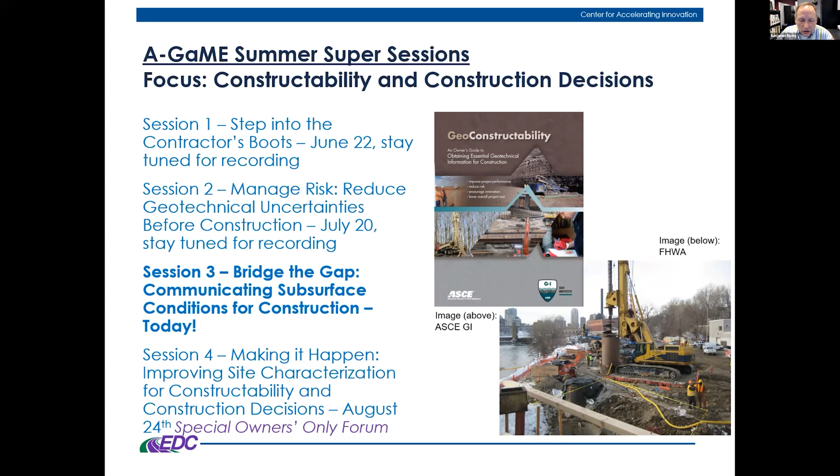This session is going to be geared toward the communication side of that. We have one additional session coming up next week, and that's for owners only. It's going to be a workshop session, and we'll talk a little bit more about that at the end of today.

So today's lineup, what you can expect to hear about and discuss during part 2. First, we're going to be talking about a resource, the geoconstructability document that was put together by the Geo-Institute, I think back in 2011. We've talked about it, we've referenced it, but we haven't opened it and haven't really got into what that entails. So Jim Morrison is going to lead us off with that and some other thoughts on the geoconstructability aspects.

We'll be talking about the communication mechanisms we have from the reporting and geotechnical baseline reports. And then we'll jump into digital transfer of geotechnical data, the next generation of how we can communicate better and improve our understanding of conditions during construction. And finally, one mechanism we have to communicate these conditions is digital visualization and integration of that, since we live in a digital age now.

Leveraging that aspect is, I think, where we need to be going if we're going to improve our understanding of conditions and take advantage of that. So that's going to be the itinerary today.

And this goes into the geoconstructability report. As Ben mentioned earlier, this was developed in 2011 with a number of contributing authors. I think Alan, who you'll hear about as well, was also a contributor. The purpose of this document was to help project this geotechnical information to a level of construction so that it is more useful and solves the problem we talked about.

The first thing I want to talk to here is the table on the slide, which identifies different types of geotechnical reports, whether they're a site assessment or a feasibility study. These are in the planning stages. The design memoranda is specifically written during design to address a specific issue. A design summary report is prepared at the end of design to document how the design came together and what was

incorporated into that design. Then a constructability memorandum would be written at the time of design to feed into the design process, get people thinking about that, and guide the development of construction documents. And when you get to the level of construction documents, you're dealing with a geotechnical data report or a geotechnical baseline report.

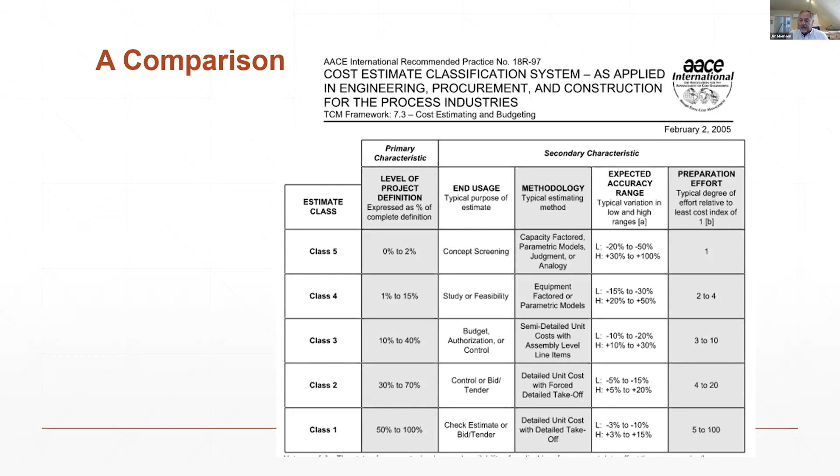Those that have estimated work, it can be 100 times difference. So when we take that into the geotechnical world, we're looking at reports that come out during a planning phase or a design phase or into construction. And this is made up by me on level of efforts, but I think a lot of people would agree.

In a planning phase, when you're doing a feasibility level evaluation, you may have the project defined from 0 to maybe 30%. Now, the geotechnical information at that time is usually done on a grid pattern. So you've got a series of boring points, and plans are developed from there. What we find in most projects, this is the time period when the geotechnical data is gathered. And many times this is the only time geotechnical information is gathered.

So once you get into the design phase, the geotechnical engineer will write a memorandum to the designer on a specific issue with advice on how to manage that specific design, the foundation elements, the retaining walls, whatever it happens to be. And at the end of that design, a design summary report is pulled together, which documents the decisions and interpretations used for design. And that's all well and good.

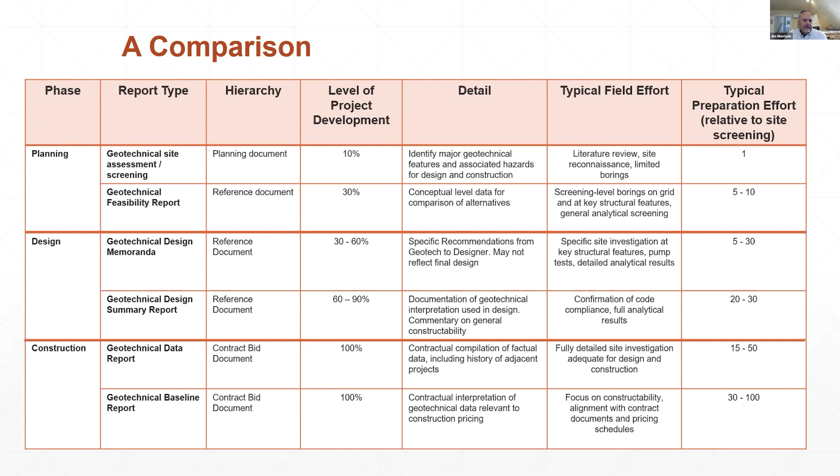One step above that is the geotechnical baseline report, which not only references the factual data, but provides the interpretation of that data for use by a contractor to prepare his bid. So the key to a baseline report is that it's from a project team to a contractor. It's focused on construction issues. So for example, if a design summary report is handed to the contractor, it may or may not be relevant to his construction issues. So this takes it to the next level.

A question that arises: how much geotechnical information do I need? And while there are many rules of thumb out there, the answer is enough to address the issue at hand. Now, because of the developing nature of projects, my recommendation when I talk to people is that geotechnical investigations should be phased along with the development of the project, so that the team has the ability to go out and address specific issues at specific times when those questions come up.

It's not hard to understand that at that feasibility level stage, when the first geotechs are out there collecting data, the level of issues that are going to arise are really not known at that point. It's the plus or minus 30% comparison I was giving. So back to our geoconstructability report, and with a quick Google search, you'll find that this is free online, which is very good for the industry.

But this document attached 10 different appendices for different types of work, and goes through a whole list of issues that are unique to that work and what should be considered when developing a geotechnical report for the purpose of construction. And without going through all of it, I will show an example here for deep foundations. It talks about things like for drilled shafts and for driven piles, the types of information that are critical to accurately estimate those operations. And so this is a good checklist or reference list to get started. And that's the purpose of it.

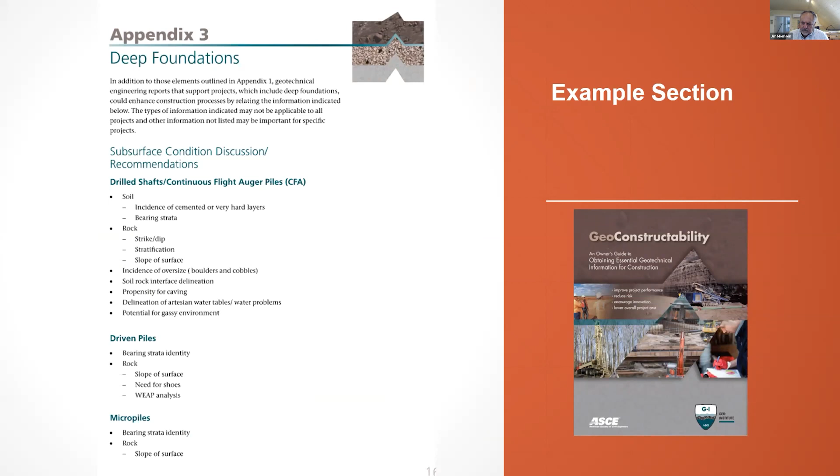Now there's another reference that's available, and this is the Geotechnical Baseline Reports for Construction document. It's a nice little handbook, first published in '97, updated, the second edition that you see the cover here, called the Gold Book, in 2007. And we have, in fact, submitted to ASCE for publication the third edition, which will come out hopefully by the end of this year. And if we have our way, it'll be called the Platinum Book. We'll have a platinum bar across the top.

But in that document, we also prepared a summary of things to be baselined for things other than tunnels. Now, a little bit of background: the baseline report concept came out of the tunneling industry. So the document talks about tunnels a lot, but on purpose, we took the word tunneling out of the title, as it's intended to be used for construction in general.

And chapter 7 in here focuses on things other than tunnels, like you see on the screen, whether they're driven piles or drilled shafts. You'll see a lot of overlap between this document and the geoconstructability report, but both are good references to use as a checklist as you're developing a geotechnical assessment for the purpose of construction.

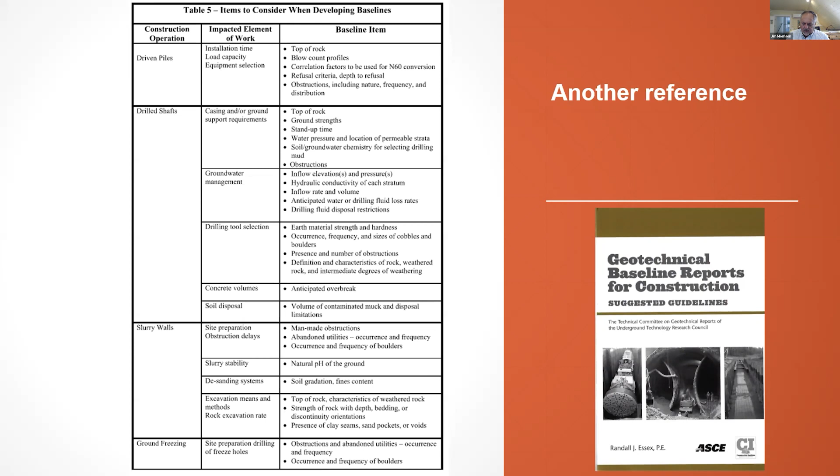I'll talk a little bit here about baselines in general. The purpose of a baseline is first to set a clear and realistic expectation of the ground conditions to be encountered during construction. This is a contractually binding interpretation which keeps all of the different contractors on the same playing field, with the purpose of making the pricing uniform, making the assumptions made very clear so that everybody's on the same sheet of music.

And also it assists the contractor in evaluating the requirements he needs for excavation, ground support, those things that a contractor has to design. And it also assists the owner in administering the contract. And if there's a change of conditions from that baseline assumption, the contract change provisions come into play, and this helps the owner administer it without going to court, without fighting through it, is the idea. And it also helps monitor the performance during construction. So that's really the purpose of a baseline report.

So key points: the baseline report is the interpretation of geotechnical data, where the data report is the factual presentation of data. Both need to work together, both need to reference each other, but the GBR, the baseline, will take a higher precedence because it is the contractual interpretation. The GBR should be focused on construction issues and not design issues. Again, it's a report as a bid document for construction. So those are the issues to be focused on. The sigma, gamma, delta curlicues that you used in design really don't come into play at this level and should be held in another report for other uses.

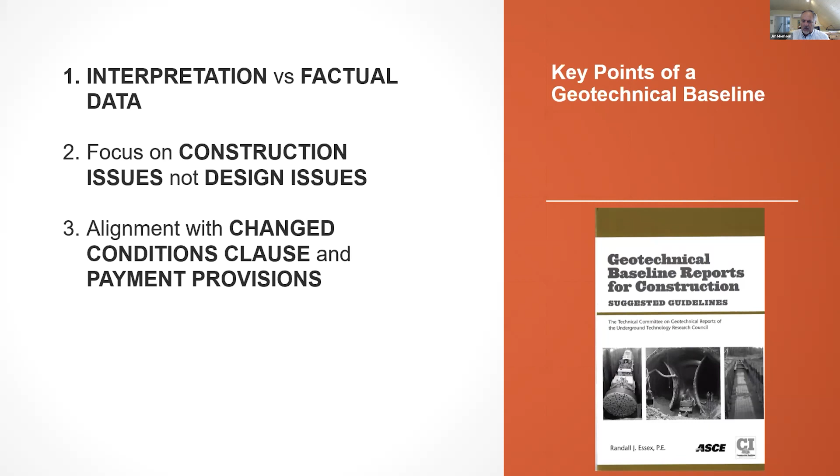So one of the key things here and where things go wrong is when there's a misalignment between what the baseline report says and what the change condition clause says. I've seen several cases that have gone through a very extensive baseline only to turn into the contract general provisions, and it says, basically, there's no right to present a change condition claim. Well, this is a case that ends up in court when you don't have that alignment. Likewise, in the payment provisions, if the baseline is based on one thing and the payment provisions another, then you get into a dispute on what is the baseline and how does this affect my pricing.

So common problems that we've seen over the years. Number one is when a design summary report is given a new title pasted on it, called a baseline, but it's really a design summary report. Doesn't focus on construction, goes through all of the sigma curlicues of design. They have trouble when they give an inadequate description of conditions to be expected. For example, if the baseline is written as the ground ranges from soft to hard, what does that mean to a contract? It doesn't mean anything. Or they're ambiguous, or they're qualitative. Being concise and in alignment with the decisions being made for pricing is where this needs to get to.

We've seen owners try to play games in putting these together, presenting an overly conservative or unrealistic baseline in an attempt to shift risk to the contractor, making him responsible for everything. Sounds good, but many a court case has come out of this scenario. So the lesson learned goes right back to kindergarten: be straight, be fair, be as honest as you can be, and life is better. The fourth most common problem is when there are conflicts between the baseline and the payment provisions or specifications. If those aren't in alignment, then you're going to have a lot of questions and be shooting from the hip, so to speak, in the field.

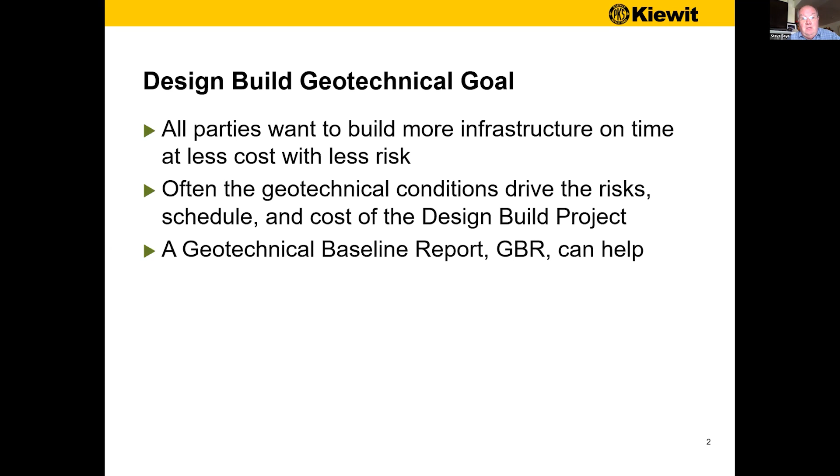The goal I would have for this presentation is to get everybody to agree that we all want to build more infrastructure on time, at less cost, with less risk. In my experience, geotechnical conditions, particularly on design build projects, can escalate the cost, the schedule, and all those things. From our experience, we believe a geotechnical baseline report can help, particularly on design build projects.

Now, some concepts for people not necessarily working in the design build world, but it would go to many estimates: most of the cost and risk reductions are really related to the contractor, to the tools you're going to bring to the site, the means and methods, how you're going to build something. Many of those decisions happen relatively early in the proposal and bid stage. But if you don't have the right equipment, if you don't have the right stuff, problems are going to happen and costs are going to escalate.

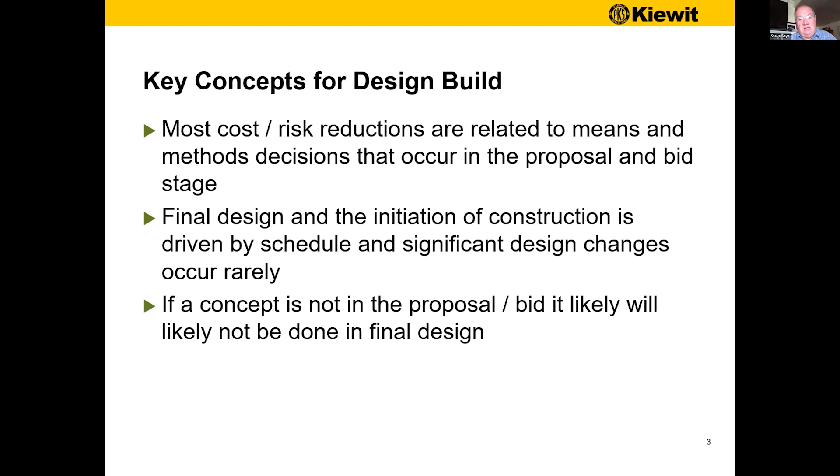As we get from the bid stage and go into, we've won the job and now we've got to go into final design, that's a pretty concentrated period of activity. Everybody wants to initiate construction quickly. You rarely see design changes occurring in the initial stages, so the builder is focused on implementing what they've done. Final design is a hard time to be able to significantly change the cost or the schedule. As I learned very early in my Kiewit career, if the concept's not in the proposal, it's probably not going to be done in the project.

Some concepts, particularly as things relate to design build projects: you want a comprehensive geotechnical investigation pre-bid, and it helps everybody. The design build teams, in many instances, are required to spend significant resources just initially defining the geotechnical issues. Particularly in the case of the job in Hawaii that I'm going to talk about, a geotechnical report can reduce the subsurface risk at bid time by organizing the subsurface data and defining the ground conditions as the basis of bid. And as Jim indicated, it's an opportunity for the owner to lay out the owner's perspective of the ground conditions and align all the contractors so they're all looking at the same thing. With the geotechnical baseline report, the design build team is then focusing on how to deal with the geotechnical issues, not trying to understand what those issues are. I believe that's the route to get better projects, lower costs, and better schedules.

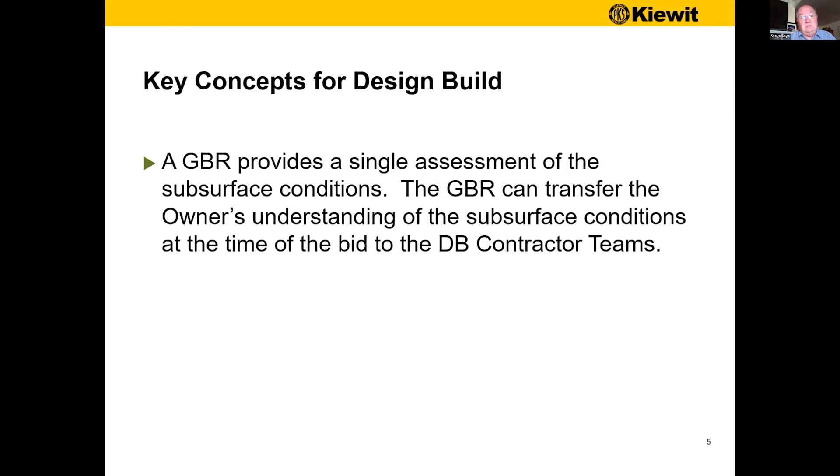The wonders of a baseline report, I believe, is you have a single assessment of the subsurface conditions. I believe they're best when the owner or the owner's engineer has spent lots of time looking at the project, evaluating it, and understanding the problems or issues regarding the subsurface conditions. This provides a method for them to communicate those to the contractor teams and get the contractor to focus on the things that are important for the project and for the owner.

Now, as we look at the things the owner's geotechnical engineer should be involved in, I believe it's extremely important for them to look at what are the two or three important geotechnical factors that are going to significantly impact the project. It could be a settlement issue, a pile issue, but every project has a couple of things that are really driving the show from the geotechnical perspective.

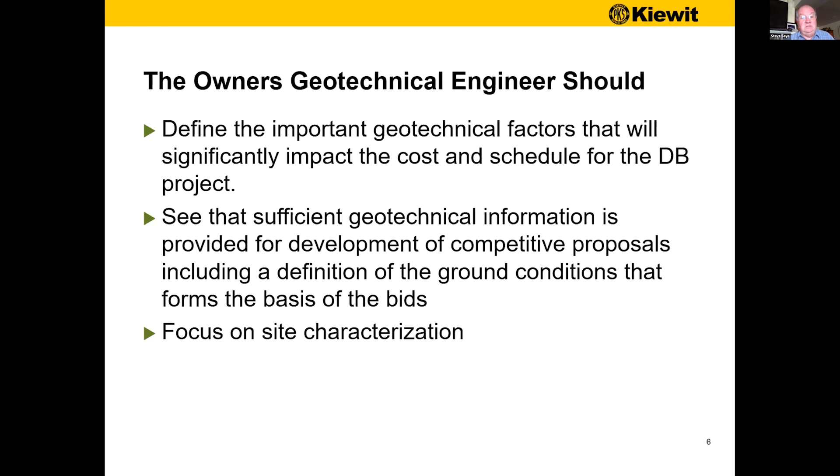I believe it's important for that engineering team to ensure enough information is provided so that competitive proposals can be developed. That's not only a discussion of what the ground conditions are, but also whether you need consolidation tests, whether you have enough information to evaluate the particular mode of settlement going on, and whether you've defined the ground conditions where the piles are going to go. It's my opinion that the owner's geotechnical engineer needs to focus on site characterization—what are the ground conditions there.

Now, things that really aren't very important to the design builder are the owner's foundation or ground improvement design. We'll have an obligation to develop our own, and where the owner may have something they'd like to see, the design builder is going to have to go do that on their own—we're probably going to repeat what the owner's done in that instance. As long as we have sufficient information to understand the ground conditions and characterize the engineering behavior, we're going to be in pretty good shape.

Now, I'll focus on this many more times—a GBR helps by defining the ground conditions at bid, and it's also very important where the owner can focus the design-build teams or contractors on key issues about those ground conditions.

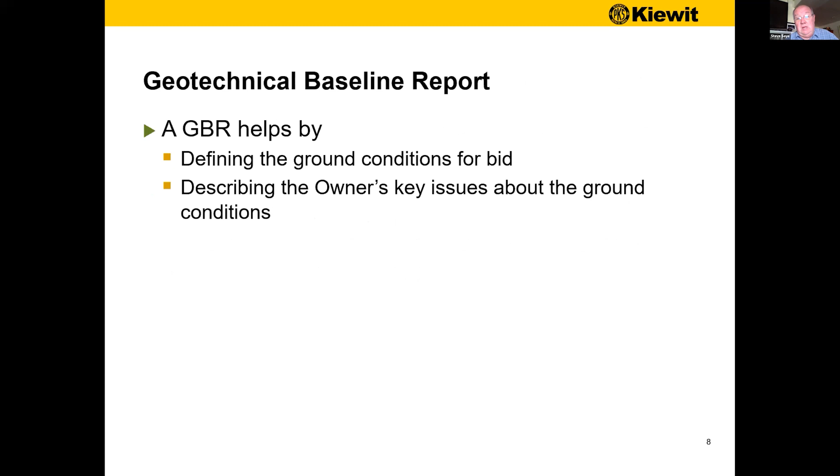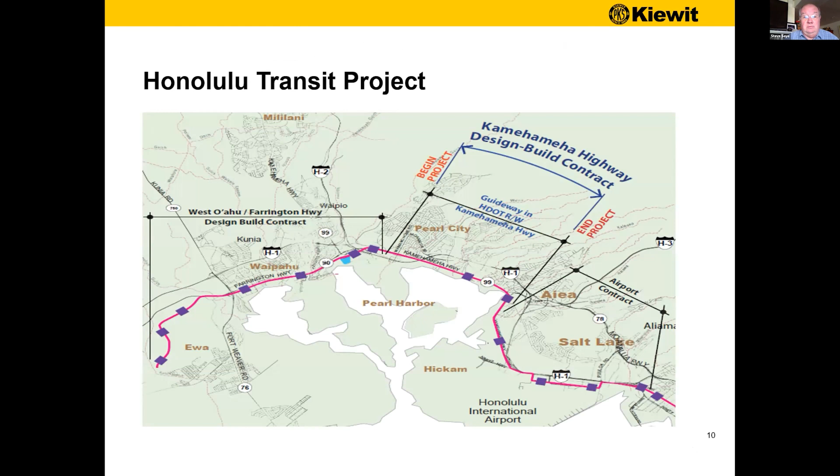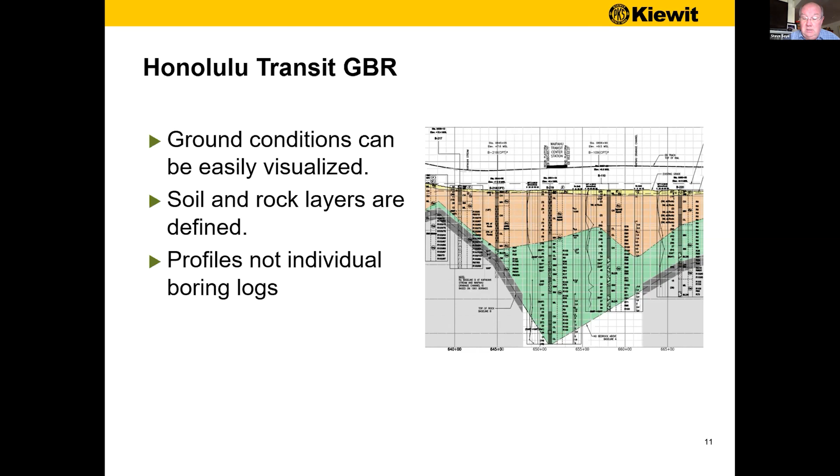This is in the context that, because it's a design-build job, only about 20% of the required borings had been provided at bid time, and the design-build team had to do the other 80%. This provided a mechanism to understand what the ground conditions were at bid time versus what we encountered in our final investigation, and whether there was an important variation.

Now, things built into the project that I think were particularly important, and that we see very rarely, is that they prepared geotechnical information to help define the contractual ground rules of the bidding process regarding allocation and definition of the geotechnical risks. These baselines were developed to serve as a contractual basis for comparison with the actual conditions encountered during construction, and the contractor may rely on these baselines in preparing his price and proposal.

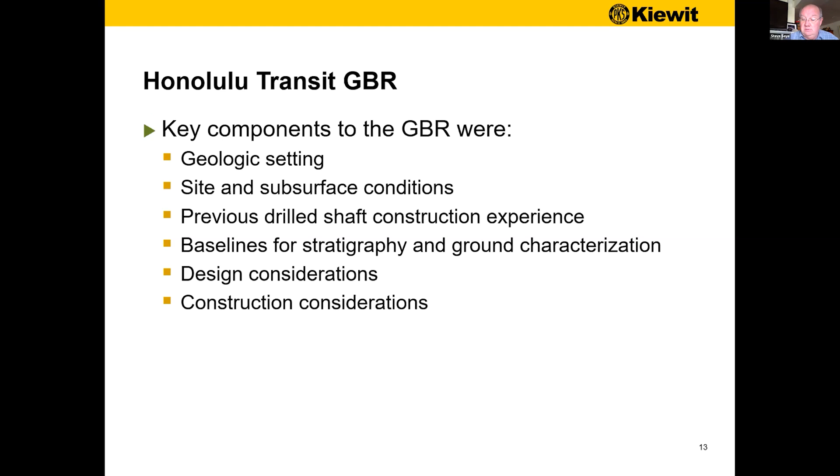The key components of the baseline reports included a description of the geologic setting, a definition of the site and subsurface conditions, and a discussion of past drilled shaft construction experience, since most of the project was drilled shafts. We had baselines of the stratigraphy and ground characterization, some discussion of design considerations, and a specific section on what Parsons Brinckerhoff and the owner considered the key construction considerations.

And in the end, after $800 million worth of construction, we had no claims regarding the subsurface conditions.

The assessments that had been made at pre-bid were generally validated with our final design, and we elected to have no claims associated with the conditions described in the baseline report. Now, a little bit of additional things that I would look at to try to repeat is, again, the understanding is this pre-bid geotechnical data is the whole basis of the team's design, schedule, and cost from a geotechnical perspective.

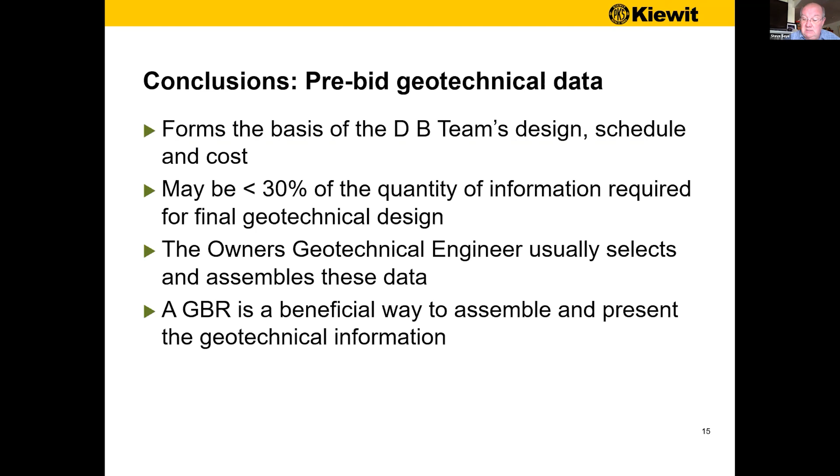And it could be 20 or 30% of the information that's really needed. The owner's geotechnical engineer is going to accept, select, and assemble the information. And it's my belief that a geotechnical baseline report is a very beneficial way to assemble and present this information for a design build project. An element of just some opinions now regarding making the baseline report and those investigations.

We need a thorough investigation. In my opinion there's a preference for more routine borings or cone soundings rather than a few borings with sophisticated testing. In my past experience, if we need the sophisticated testing, we're probably going to include it in our final design, but that's going to be focused on a particular scheme or process. So more borings, better definition of the site subsurface conditions, we think is better.

The other thing that we've seen in a variety of reports, all of this information, particularly on a big design project, is going to go into some kind of a 3D model to define the ground conditions. So we absolutely have to have survey information to give us the XYZ data to be able to make that 3D model successful.

Things that I don't see in many geotechnical investigations: you're in a seismic area and the SPT hammer energies are not presented. Groundwater levels are a chronic problem, I think, at least in my instance, of not having a good definition of the groundwater table or having no information on a log as to what the groundwater level is.

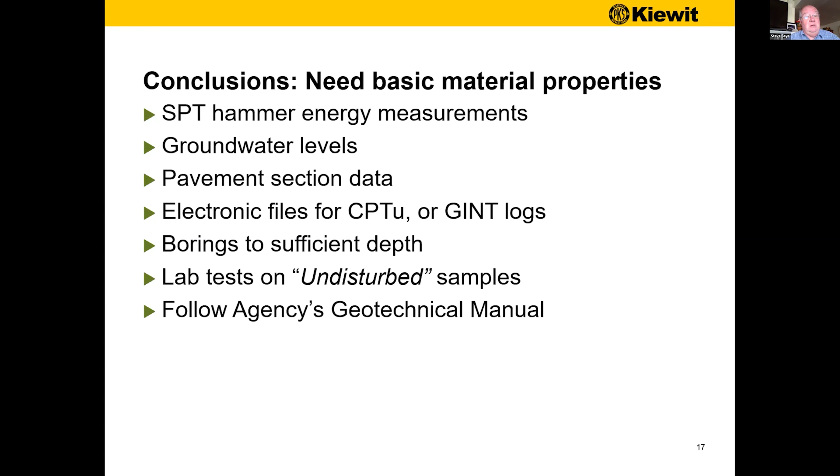And then we love the geotechnical instruction manuals that the states have, and it's just important to make sure that subcontractors have actually followed the manual.

Timing of information, particularly on the pre-bid, we've certainly seen projects where information can dribble in at the end. Geotechnical design, particularly on a large project, is essentially complete about halfway through the bid period. There's a bunch of other things that have to happen after that, and data received after that time is probably as much confusing as helpful.

And it just really doesn't do a lot to impact the design builder's means, methods, and costs. Receiving the results of an Osterberg cell test on a drilled shaft two days before the bid is due—it's just really hard to get that thoroughly evaluated and incorporated.

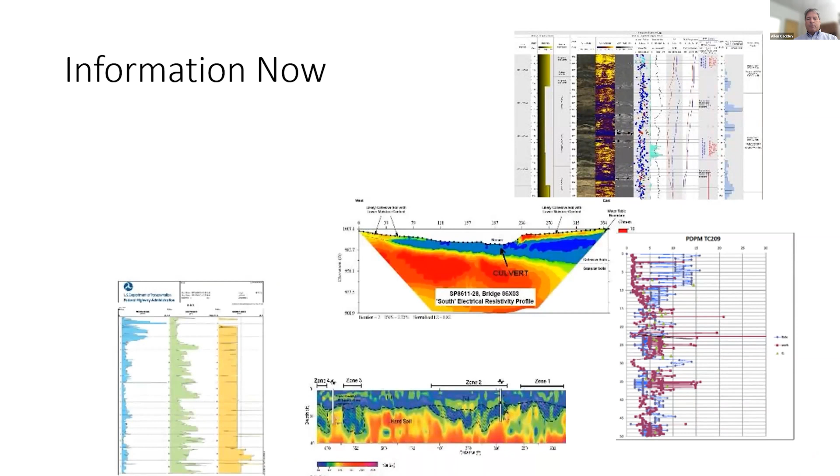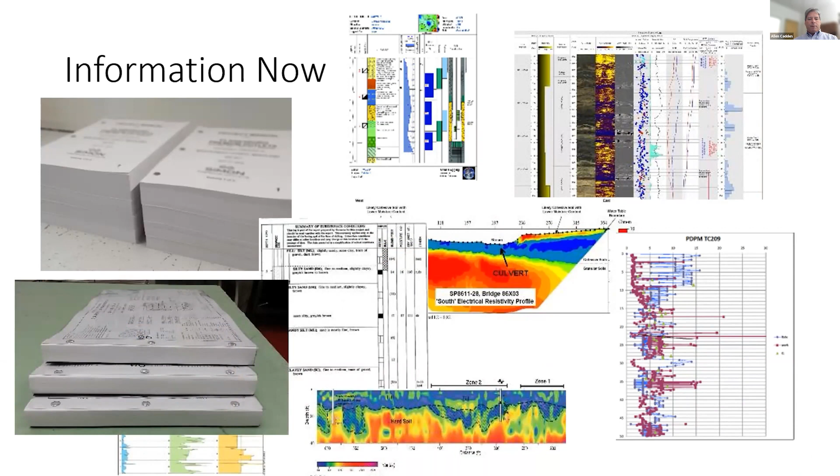The beauty of computers, though, throughout our careers, is that projects are getting larger and we're able to create more and more data. We're generating massive amounts of information to provide to the contractors, and that information should be usable during construction and to develop the bids. The key thing is, though, we dump all this massive data on you and ask how soon can you give me the price. As Steve indicated, getting data two days before the bid is due doesn't do anybody any good because we just can't assimilate it into the process.

So let's cut to the chase. What if we did something totally different? DIGGS is a standard that we've been working on for about 15 years, and the goal is to be able to exchange data in a common structure that software can understand and use. We don't want to continue manipulating spreadsheets and columns and trying to figure out what units they're in to make sense of it. This is not a proprietary system. It's open source, and everyone is welcome to contribute to its development and the refinement of the schema itself so that we can keep it growing.

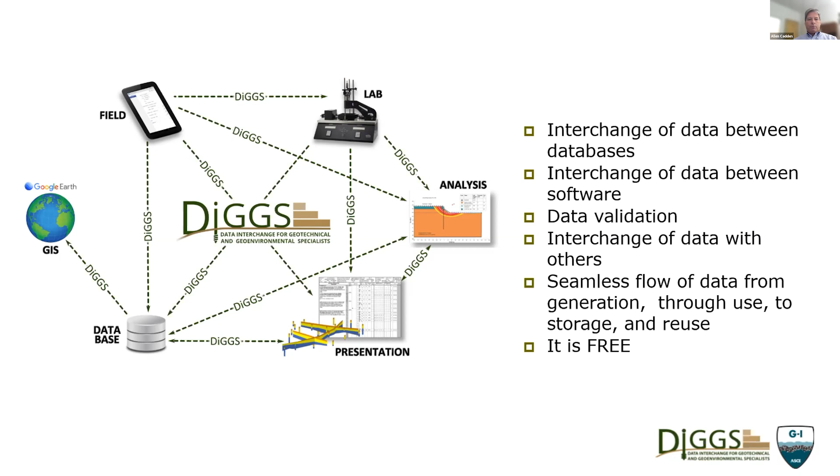It's an XML schema, so it's just like a web page. If you've ever accidentally right-clicked on a web page and picked 'view source,' you'd see something that looks like this. Every web browser out there knows how to read those XML files and turn them into web pages. All DiGGS does is provide the definition and the structure for how to describe the actual geotechnical data elements and the metadata about that data point.

So how was it collected? What test was used? Where was it in the sample, where it was in your boring profile—all the pertinent data to help you understand what that piece of data really means. It's a common format that we can all understand, or at least that we can program our software to understand, and file this data quickly for us.

The other beauty of it, as Steve indicated, is it's tied to Geography Markup Language, or GML. GML is what's used by every geographic information system out there. It has that X, Y, Z coordinate system tied to every piece of data in DiGGS, so we know where it is, and we know where that is in space, to be able to create those 3D models.

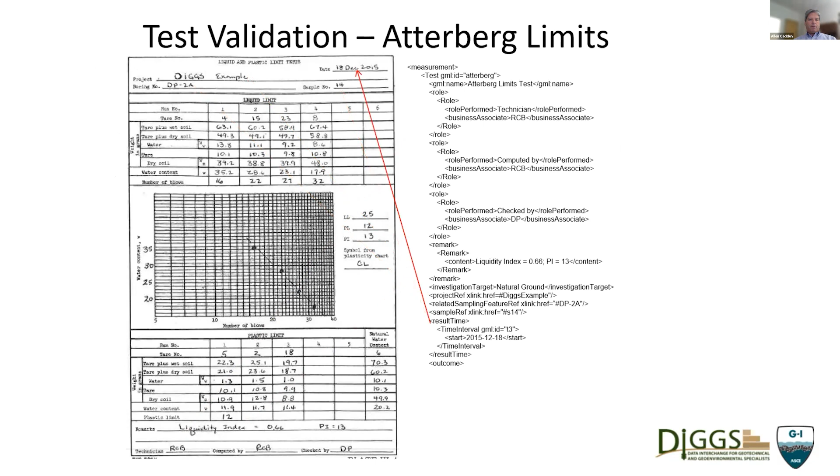So in a nutshell, if you could record it on a form in the past, we've developed rules for how to write all of that data into a computer format. Take any piece of data on this sheet, and we have a place to put it in the DiGGS schema to be able to transmit it to anybody out there to use later.

Starting with consultants, it's my world. The concept that data can be collected in the field in whatever digital manner you like, and then we never touch it again, was really intoxicating to me. Just as I mentioned, the swapping in and out of Excel and all kinds of other programs just doesn't make sense anymore. But you start thinking about that workflow and the process improvements you can make if you're not spending all your time manipulating, retyping, and rechecking data sets. It's a huge opportunity for us.

So there's real time and cost savings sending data to and from consultants—that's a real labor-saving step there. We're eliminating wasted time of data entry and reentry. The QA/QC processes are done once, really at the point of data entry. And then we're also seeing the benefit of reduced risk. Now, instead of potentially fat-fingering data into another spreadsheet, we know the data is being transmitted directly as it was intended from the beginning. The goal of that is to really leave us with more time to do the fun analysis, hopefully providing better solutions and better construction documents.

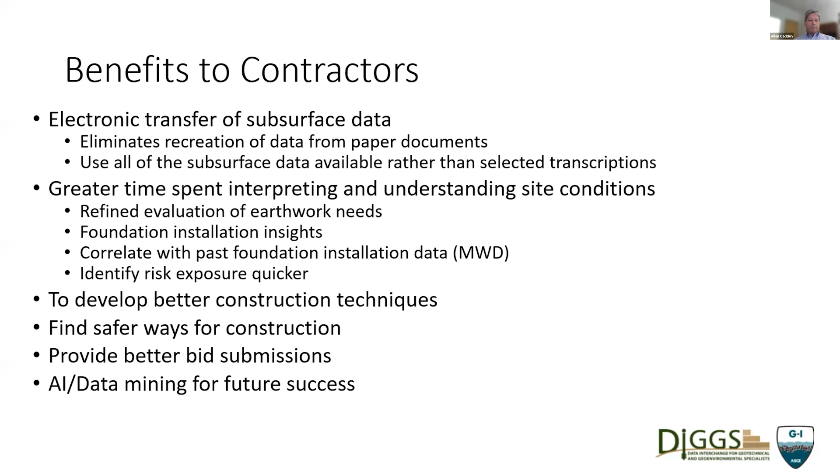But let's think about it if we go a little beyond the design stage and we now have the data in a shareable format and geographically located in some sort of a map system. Now we're able to look at that data and share it for bidding purposes. We can transmit that data directly into the field for layout of the foundation elements, so that the operators of the rigs can understand what the installation parameters need to be, depth, size, what kind of resistance they're looking for, the foundation capacity or the bearing materials.

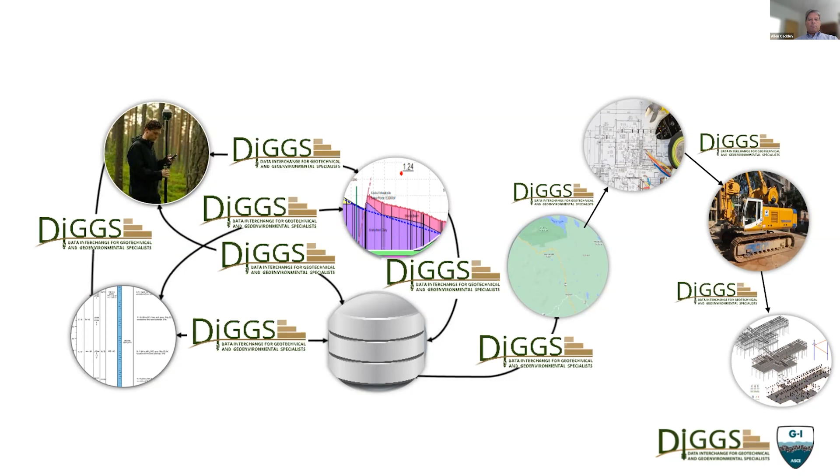And then they can also take that data and transmit it back to the office and back to the owner in the form of their as-built reports and become part of the actual BIM model for the project for the long-term management of that asset. So we're now in a digital world. We're talking about big data. It's about time to stop maintaining manual spreadsheets, and we want to be able to mine that data for real-time reports, whether that's during design, construction, or that long-term management.

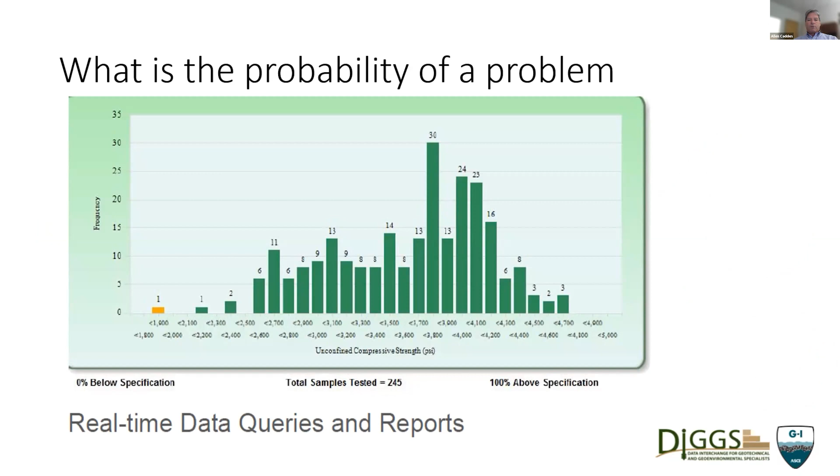How do I start understanding the data, not just in the report format that was provided to you, but digging down a little deeper so that you can make sense out of it as you start thinking about how you're going to build that project and move through the site.

Could also be a site where there are 300 CPTs, and we need to quickly look at those and understand across the site, where are the sand layers, where are they thicker, where are the organic materials, how might that impact my construction scheduling or process as I move through the site.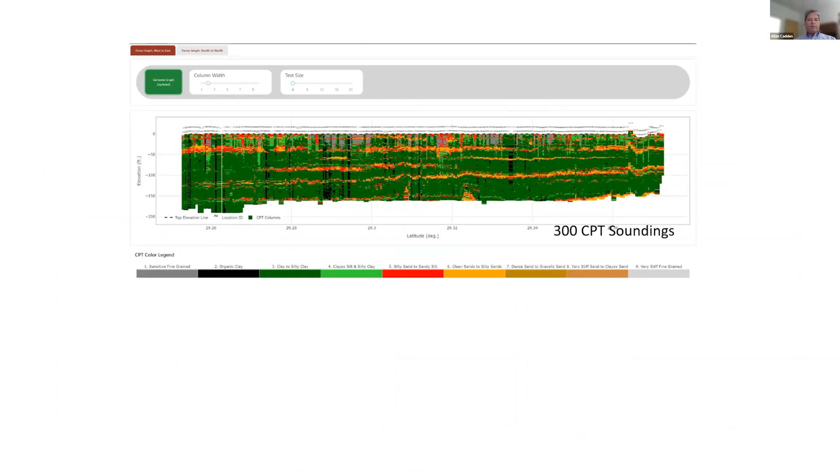Or maybe I want to look at the geophysics and see how they correlate with the borings. And are there any surprises between borings that I should potentially watch out for, or maybe go get a little more data to help fill in that gap?

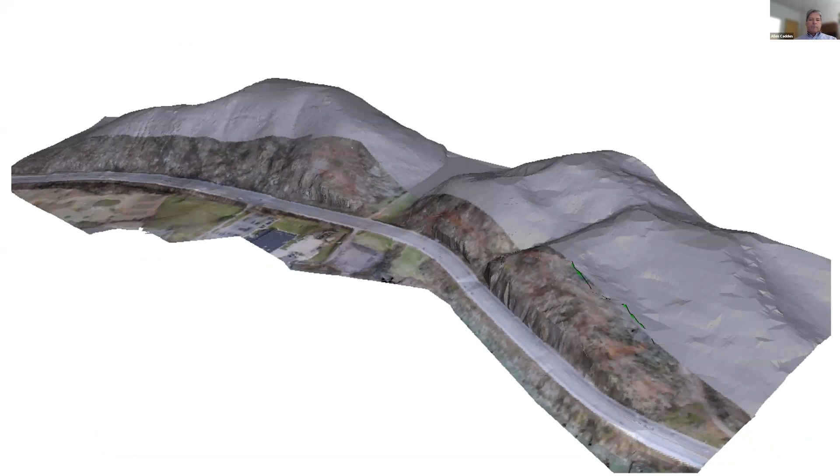Or as Steve said, let's start putting in three-dimensional images and start understanding what's going to happen on our site. And I can peel back that surface layer and see where all the geophysics and all the borings were done on the site, so I can start understanding how things are laid out instead of just taping printouts from a report together and hanging them on the wall.

I can zoom in and see some more detail and focus on those borings and geophysics that are of interest in a certain area, and then add my retaining wall to it and see how that overlaps, and maybe even how those anchors are going to interact with the anticipated ground conditions.

Again, if you want to think about a dam site, we've got borings on a dam. It's easy to see that in 2 dimensions, but these are all oriented in different directions. So how do I understand how the orientations look below ground and what materials they might be penetrating? How that might interact with the core trench that's going to have to be excavated for construction of that dam, or potentially impact the grout curtain that we have to drill and install for the project.

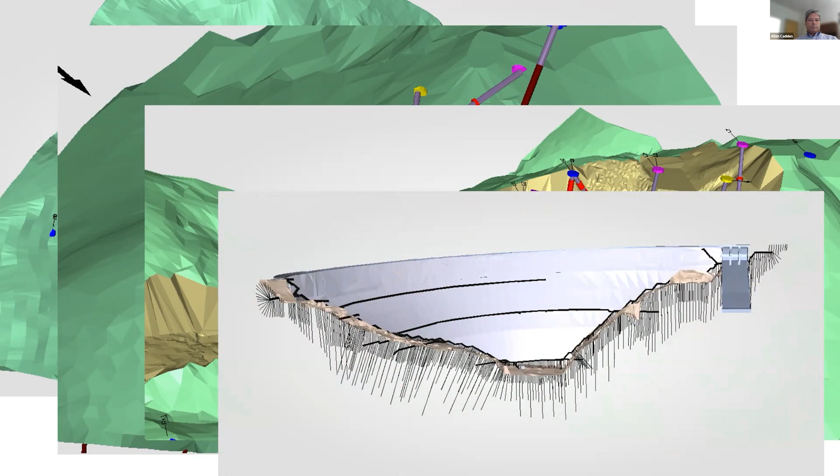Here's kind of an interesting example of a bridge abutment sitting on the top of a rock knob. As you can see, there's some bedding planes in that rock formation that are not really conducive to holding up that rock block forever. So we have to anchor that block together. And to do that, you're drilling through the bridge deck and hanging under the bridge deck in really limited access conditions. So how can you adapt to the very irregular site conditions and access restrictions you have out there?

Well, that data is provided to you digitally. You can now look at that in 3D, understand where those anchors are going to be located. And if we start tying that to the design analysis itself, we can feed the data back and forth. And as you realize you can't get to that one spot for an anchor, you need to move it over a couple feet. You can update the analysis and make sure you're getting the strength requirements that you need.

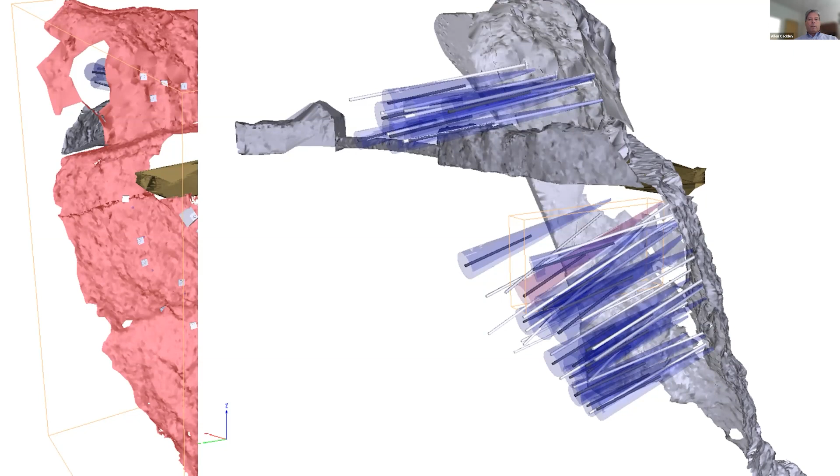But more importantly for the contractor, you can also understand conflict issues with, if I move that anchor and I have to put it in a different orientation, is there a potential for me to intersect one of the other anchors that were already drilled? So understanding that on the fly and in real time in 3 dimensions, so you can actually visualize what's going on, can be a great asset for your project.

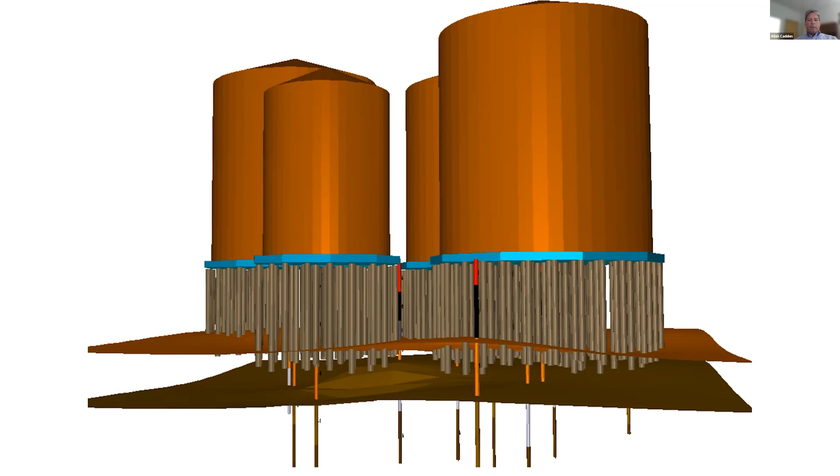A little more traditional vertical elements, how do these elements interact with the local geology? Questions about, as I'm doing this installation, are these elements reaching the bearing stratum that was intended? Do we wait until a stack of PDF reports are delivered at the end of the project and the engineer has to retype these into a spreadsheet and reassess their quality control at the end of the job? Or do we actually feed this data in real time back to the engineers and back to the office so the people can be summarizing that and making sure the project's going as anticipated?

Some of you might have seen this already, but on a screen, all this data, even these 3-dimensional models that I just showed you, that can be spun around and seem pretty cool, really are still just 2-dimensional representations on a screen. However, we're now in a world where these VR headsets are readily available pretty cheap, and we're able to start viewing this data in real 3 dimensions. We can walk around and walk through and under a project and start to really understand what's happening in the subsurface conditions and how our construction processes might impact those conditions or how they might impact the construction.

Just a final word, there's a new kind of not-for-profit group that's aggregating data from across the country into a portal that will allow you to compare your data with other nearby conditions. The Geosetta is pulling in right now a lot of publicly available data, and they're going to continue to expand this. But start thinking about how we can use this to understand not just the site we're on, but maybe some of the other regional conditions around it and anticipate problems that might come up.

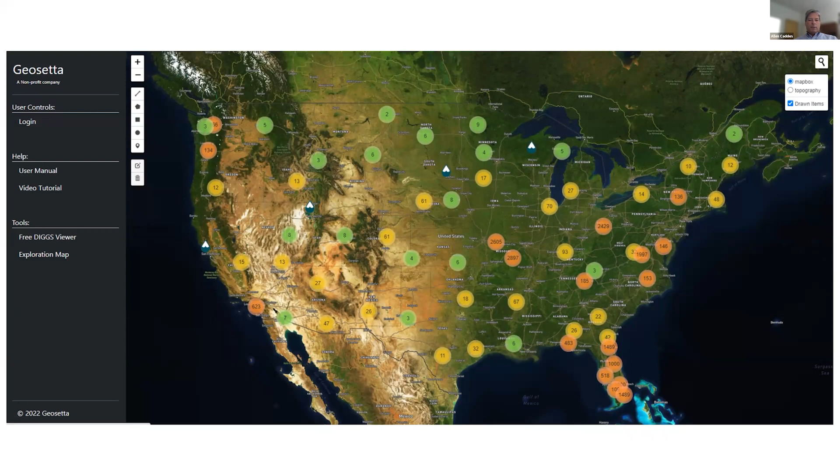Or maybe we want to compare the geologic conditions here with similar geologic conditions in another area that we've worked with in the past. Having this larger amount of data is going to start making us smarter about what we do. So we're all collecting a ton of data these days. Unfortunately, the promise of paperless offices has yet to become a reality, and we still transmit flat information sheets. The A-GaME tools are all digital, from the televiewer and the geophysics to CPT and MWD. It's really time that we begin to fully utilize that digital data to become more efficient and effective in our work.

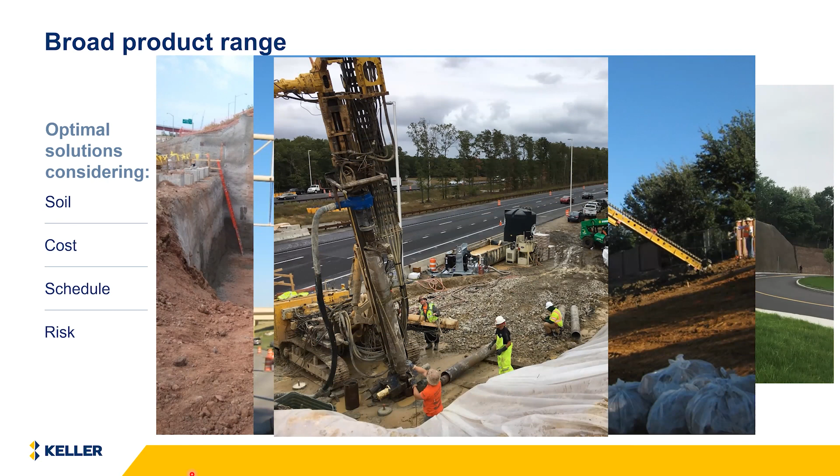Drilled shafts are kind of similar in that way. There are some initiatives towards measure-while-drilling, and we're going to talk about that a little bit in context with rigid inclusions for evaluating soil properties or soil conditions as we go. But drill shafts are also an example of something where we're getting data as we're doing the installation.

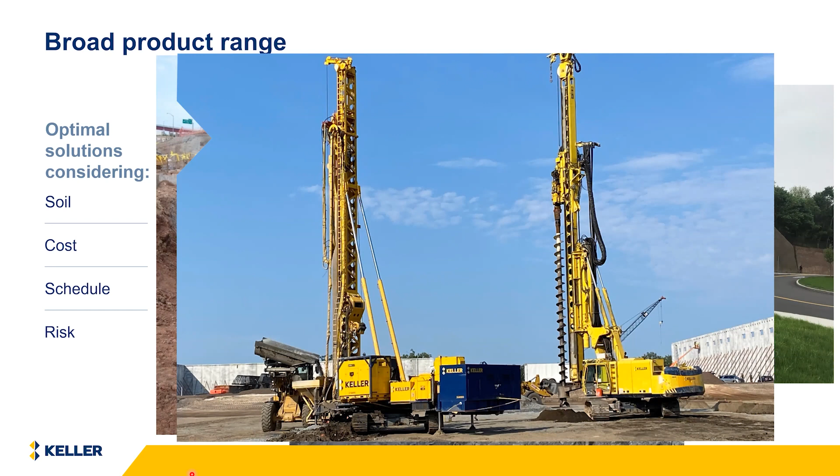Moving on to ground improvement, here's some equipment that might be used to install a stone column or aggregate pier. On the right side is a pre-drill rig. You may not be getting a lot of data from that other than depth, but on the left-hand side is a vibrofloat. So we're getting information like stone volumes and the amount of energy that's going into compacting the stone, telling us something about the density in the soils around it. So all these indicators that we can capture during the installation.

And the topic of today is rigid inclusions. We're typically using large European-style drill rigs. What you're seeing on the left-hand side here is what's called a Bauer BG36. And we're going to talk about some of the components of that and what are the things that we can measure, the data that we can acquire during the installation.

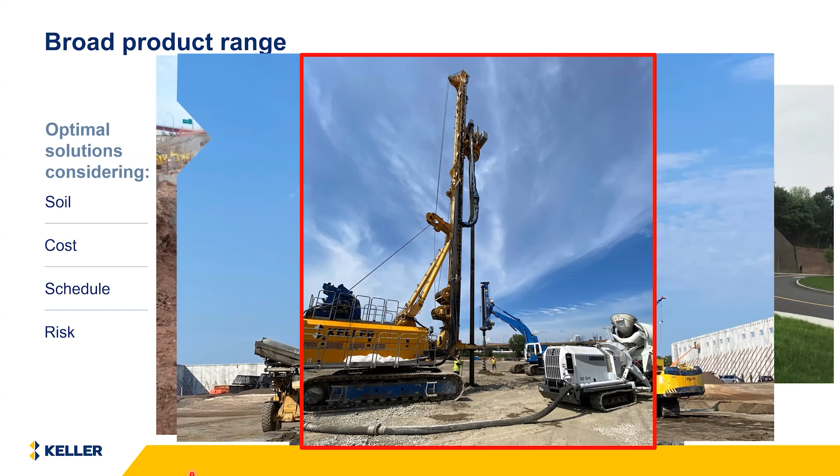One other thing to point out here is part of the process is pumping grout or concrete, and so there's a concrete pump used for that. That's also something that you can acquire data from during the installation to monitor quality control.

Just before we jump into the rigid inclusion, let's clarify what that is a little bit. It's usually a grout or concrete column, typically unreinforced. Definitely used for a lot of building supports, but also within the framework of DOT work for column-supported embankments. Those elements are installed underneath the slope and underneath the roadway, usually in combination with a load transfer platform, which is helping to spread the load out and transfer it to the rigid inclusion. That load transfer platform may also be used to reduce lateral deformations, especially for an MSE wall, and reduce the amount of reinforcement that's needed inside the MSE wall.

So let's talk about the anatomy of that data acquisition system. What is it that we're actually measuring? On the left-hand side here is a large drill rig. Up at the top is the rotary head, and it's turning to advance the tool. We can measure the rotation speed, how fast it's turning, as well as the torque, or how much effort is being applied to the tool to turn it.

We typically think of torque in terms of foot-pounds or kilonewton meters, but sometimes we have to get that information from hydraulic pumps that are operating the head housed within the body of the rig. Another thing we have the ability to capture is information from the crowd winch.

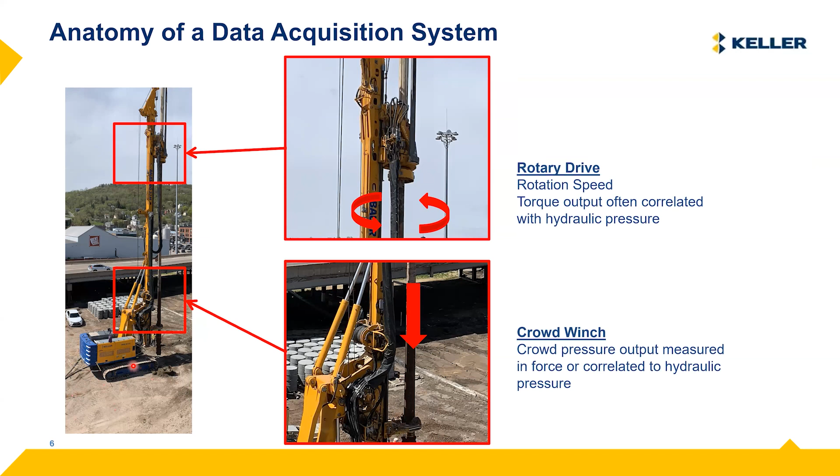This is getting to crowd force or crowd pressure. Depending on the software and hardware available for your project, you might be able to get the actual crowd force. In other cases, you may be getting a hydraulic pressure, again kind of indicating how hard the rig is working to push the tool into the ground.

In addition to those energy parameters, we can also look at the depth. We're going to compare that to the borings, as we'll see later, but also the penetration rate. Ideally, the faster it goes into the ground, the softer the soil is. So those are other things we can record and use as context for evaluating this information.

Getting to the second half of the installation, you've gotten to the bottom. Now there's some things important for quality control that I want to point out, because we can capture that information and it is useful, even though that's not really going to be the majority of the discussion today.

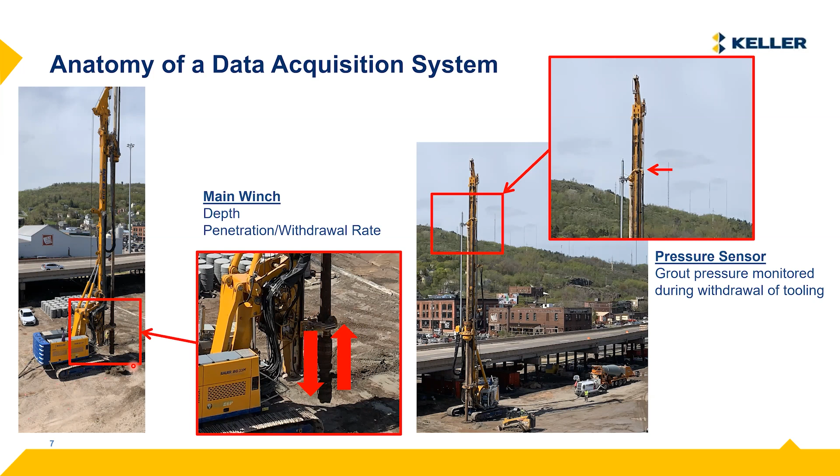There's also the grout or concrete pump I mentioned previously. There's typically two ways you can count the strokes from that pump, which give you an indication of the volume going into the element. Sometimes that stroke counter is located directly on the pump. Other times it can be in line here and attached to the rig, counting a pressure spike in the grout as it passes through.

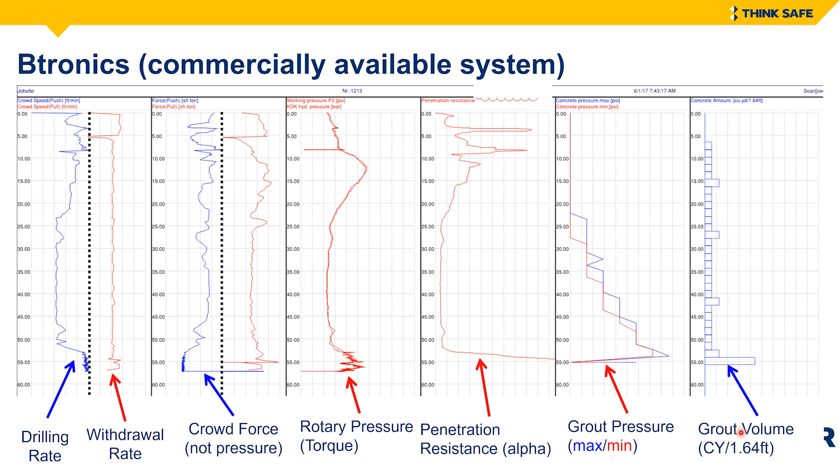Another interesting thing is the penetration resistance, which I'll explain a bit more in a second. This is a specific parameter to this particular system, and we use it quite a bit at the Minnesota DOT project. Then collecting that grouting information, looking at the max and min grout pressures as we're extracting the tool. And on the right-hand side, you're getting an idea of how much volume is put in per stage. The program defines the stage as 1.64 feet, which is about half a meter.

Taking a closer look at that penetration resistance, or alpha value - the manufacturer of this software and hardware defines it as torque versus penetration rate, essentially. Penetration is defined as the distance the tool travels for one rotation. Then looking at how much effort goes into that, the torque, and normalizing that into one value that gives you an idea of the effort required to advance the tool.

The manufacturer defines this as the index for penetration resistance, and says it shows the bearing capacity of the soil. I think we have to be a little careful using that - there's probably some promotional language, or maybe overpromising, going into this by the manufacturer. But we definitely think it's a valuable tool, one that we've used, and we'll show an example here in a bit. Just wanted to point out, while we're looking at this, some big changes that I think are useful.

If you look at this red squiggly line here for the penetration resistance, that value gets really low from about 20 to 50 feet. And we know from comparing that to borings that this is a softer soil layer. Then, where we anticipated the bearing layer here around 51, 52 feet, that penetration resistance goes way, way up. That's consistent with a very dense sand that we knew we were toeing into. So this is telling us that we can get information from the installation that correlates in some ways to what's happening within the soil profile.

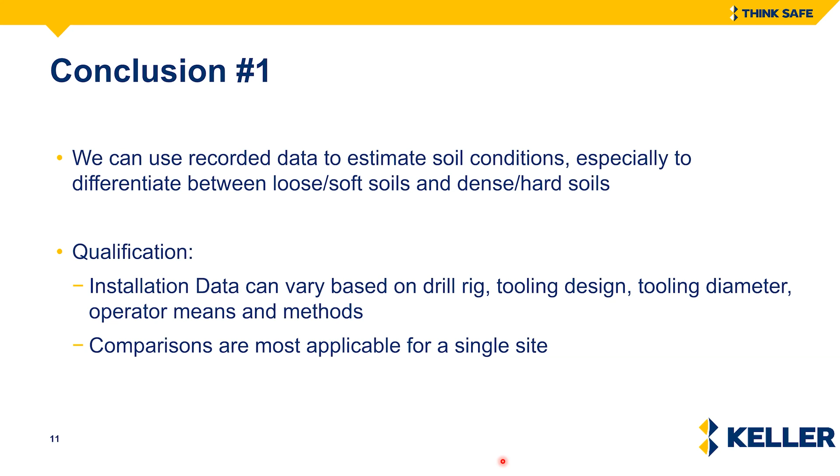When you're doing a boring, when you're doing the CPT, the goal is to get information, to record it and log it as accurately as possible. The driller's job, on the other hand, is to put the element in the ground as fast as possible with the best quality possible. So we have to account for some of those differences in intent when interpreting the information as well, knowing that we're going to see more resolution out of borings and CPTs than we will out of a log that's created from a drill rig.

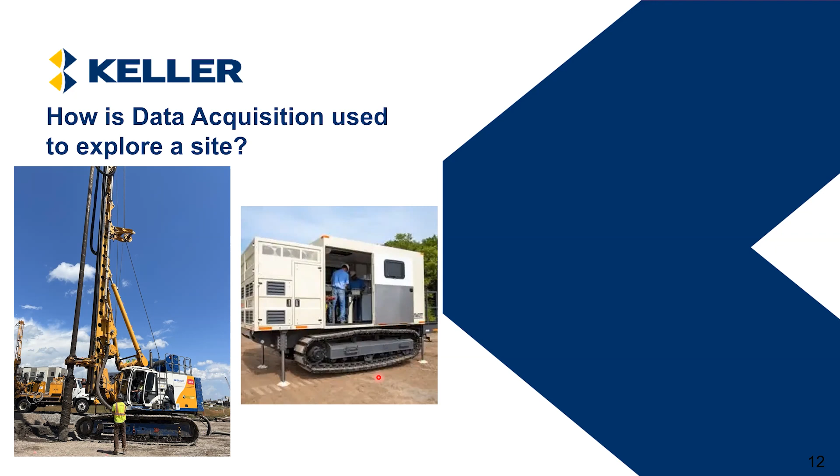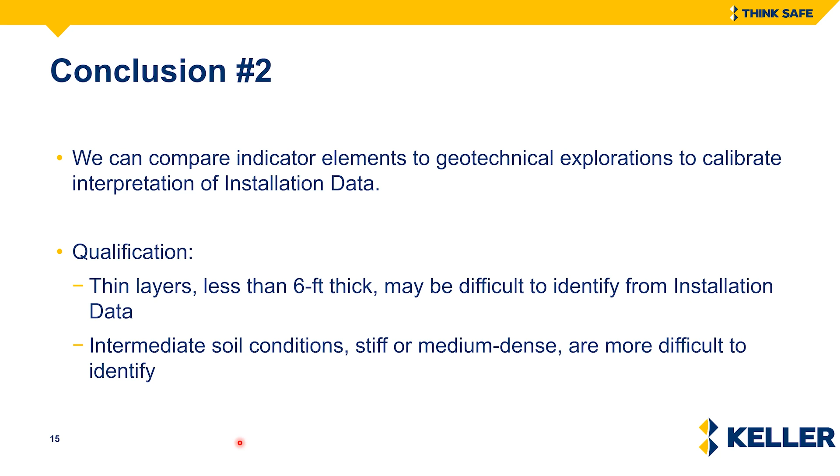As we talked about, thin layers can be difficult to identify, and we didn't really touch on this a lot, but intermediate soil conditions, especially transitions from loose to medium dense sand or from soft to stiff clay, can be hard to identify the same way that they'd be able to identify through an SPT boring or a CPT sounding.

And with that, I will hand it over to John Gill to finish up.

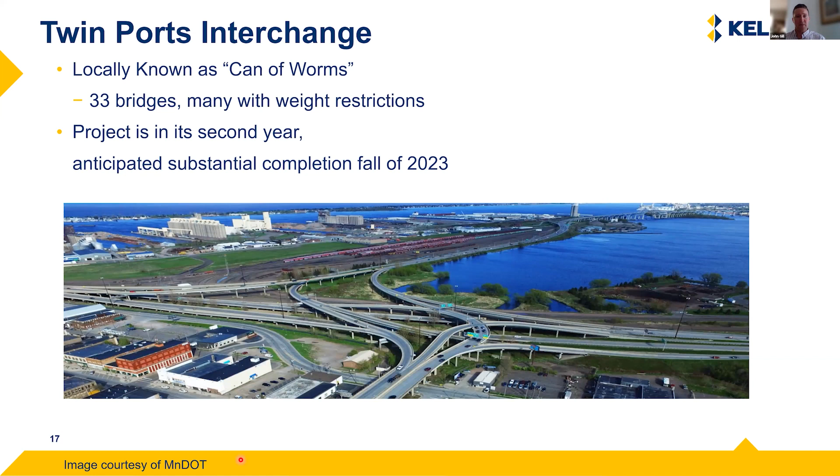So the team - Minnesota DOT is the owner, and many thanks to them for allowing Keller to share a small piece of this project. The project delivery method is CMGC, a partnership between Minnesota DOT and Ames Kraemer joint venture, who's been involved as the CM since the nascent stages. Minnesota DOT also hired Barr, who is involved in the entirety of the geotechnical design, working closely with MnDOT. There were over 500 borings completed across the site, about 250 or so along the alignment of the ground improvement rigid inclusion locations, and everything else was for associated structures and shallow borings.

The Itasca Group is a subcontractor of Barr's, and they're responsible for all numerical modeling. Barr and MnDOT put together a comprehensive 3D soil geotechnical model, which we've all been discussing this morning. Itasca was responsible for working with Barr to come up with the full rigid inclusion design. So in this case, Keller is really just the rigid inclusion installer. But I think this speaks, and hopefully the rest of the presentation speaks well, to the required partnership between all the teams to utilize the power of comprehensive investigations, coupled with data acquisition.

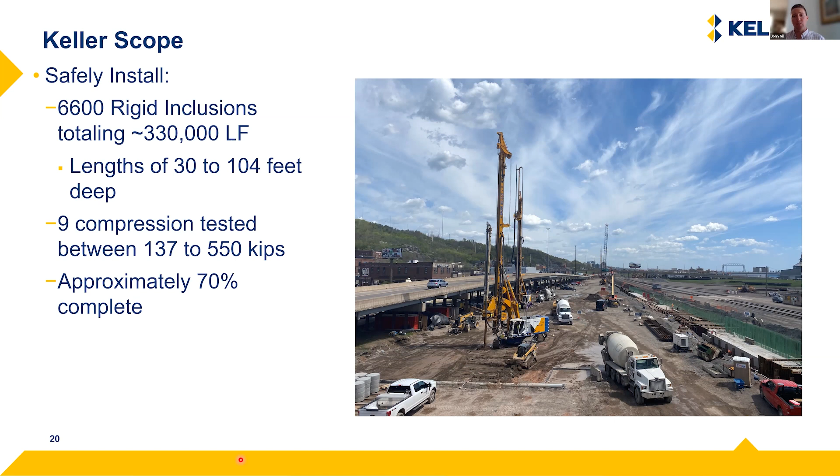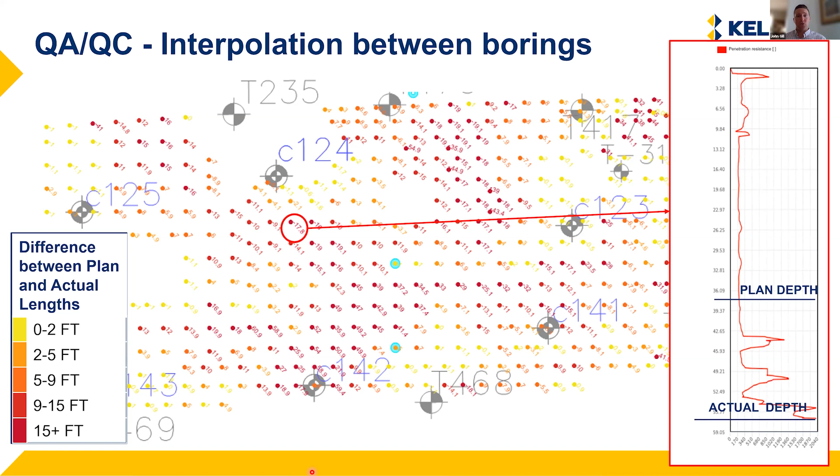This really brings us to our final conclusion, which is that with the appropriate amounts of data acquisition, we can really interpolate between explorations to determine appropriate installation depths or parameters, whatever that may be. Similar to what Ken was saying, obviously some caveats on that, based on actual conditions, but with some consistency across the same site regarding drill tooling and drill rig operators, that sort of thing—it's a really powerful tool, both in terms of interpolating and extrapolating from where borings could or could not be performed.

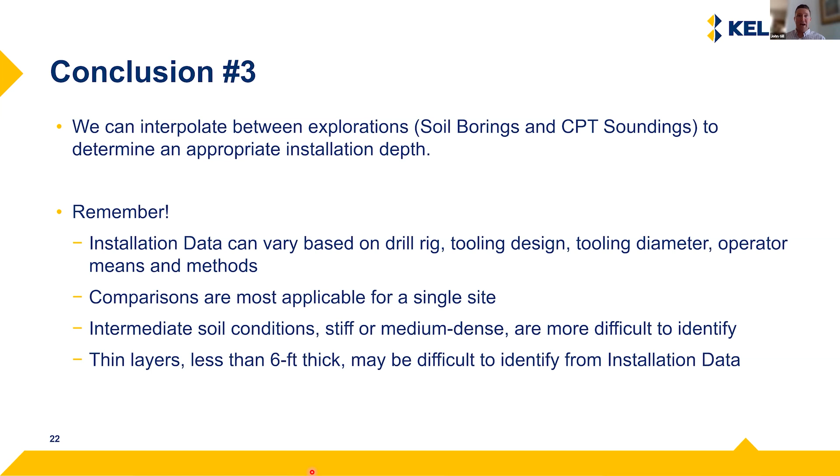Again, really just speaks to the need for partnerships between contractors and design teams, which this has been a real success. So, with that, I will turn it back over to Ben.

Excellent. Thank you, Ken. Thank you, John, very much. Great presentation. And really speaks to the fact that we do live in this digital world. And I'm curious to know your thoughts. The fact that now we have the ability to provide CPT data beforehand to inform you of those types of conditions, and you have the ability to collect data real time during your processes that provide feedback to those types of conditions.

How do you see, obviously, very similar to measurement while drilling, the tooling, the drilling system is going to play a part, the wear on the bit, all of those types of things have to be considered in the measurement that you're getting. But understanding the fact that you have data that you get beforehand, and now you have data that you can provide back. How do you see the value there, in both making your estimates and also being able to provide some criteria for acceptance to the owner, using this type of communication of real data?

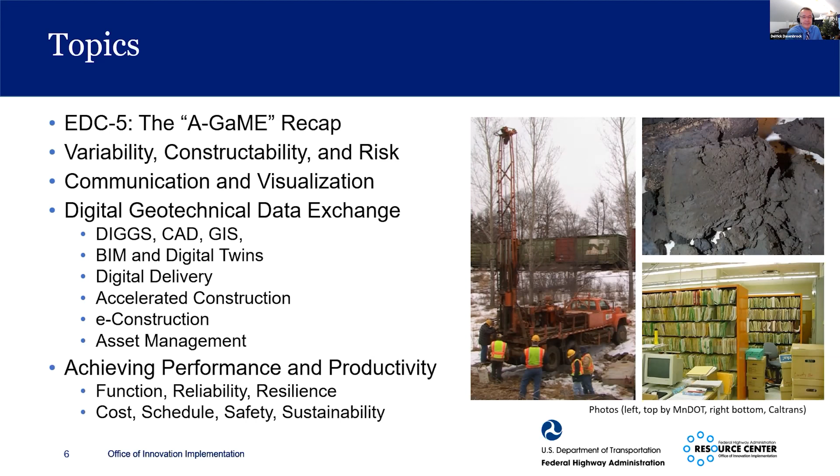We've talked a lot over the past several years about the A-GaME and its mission of promoting effective exploration methods, practices, and technologies with proven potential. They've been used before, they're not new. We just feel that they're still underutilized in the profession in US practice. These newer methods often help add quality, accelerate project delivery, reduce cost, and improve the reliability and performance.

Often, they are providing us fast, high quality, and digital data. We'll talk more about that soon. Many are safer than traditional rotary drilling practices. That's often sort of an unsung aspect of some of these techniques, which probably should get more credit than it often does. Geophysical techniques are particularly well suited to areas with difficult site access.

All of the techniques are cost effective, and they can generally be provided with local consulting services or certainly regional, and often with experience, again, they can be performed very effectively in-house by an owner or agency.

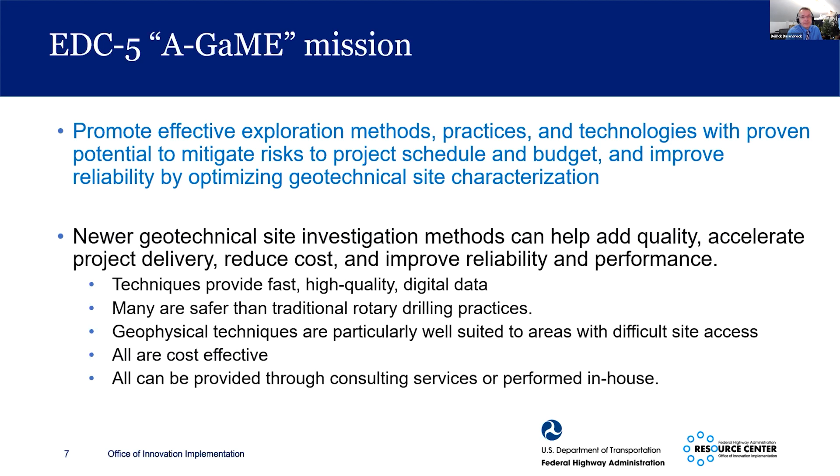So in addition to the things that we typically think of, cost, time, quality, improved geotechnical data really leads to what I'll call right-sized foundations. Less conservatism leads to reduced construction materials in some cases and the time to construct. You can think if your facility is optimally designed, you aren't bringing in excesses of concrete and steel and having to deal with all the trucks hauling material in or taking excavated material out, which also has impacts for sustainability.

Appropriate means and methods and bids also means that you're paying for the right amount of work associated with your project. A lot of the information, if it can be acquired ahead of time, improves bidding documents. Contractors are all bidding on the same thing. They're bidding on, I'll say, the correct scope of work for what you're trying to do without an appreciable level of, say, conservatism or redundancy that is out of balance with the rest of the work.

This also means that there's reduced potential for work stoppages, changes in plans later on, contract amendments, so we can think of all the administrative burden that's involved, but also delays in the progress of the other work. Geotechnical works often come at the very beginning of a project, so you can imagine that any overruns have follow-on effects for the rest of the project.

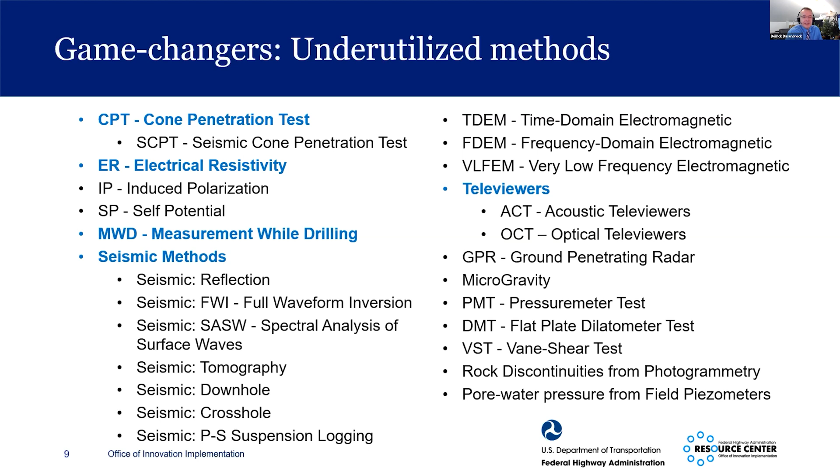So cone penetration testing is one of our featured A-GaME technologies. More reliable parameters than traditional standard penetration testing. Small stratification changes are more easily discernible. You get pore water pressure measurements. With added modules, you can get video and seismic measurements.

The seismic measurements are especially useful if you're doing seismic design because they are direct measurements of the wave speed through the ground, and it's faster than conventional drilling. So you can get more information in an equivalent amount of time, and it often can complement other technologies.

Geophysics, there are a number of different methods for mapping contrasting materials and groundwater conditions over large areas, and this information can be used to fill in the gaps between our borings or soundings very efficiently.

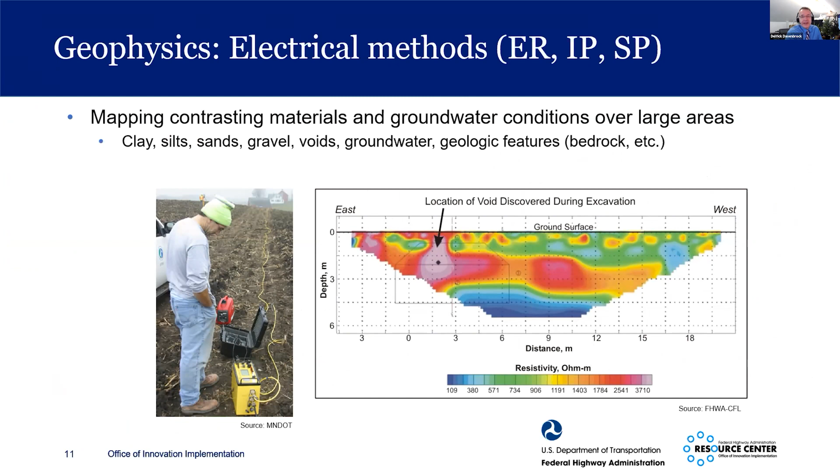Measurement while drilling is a technology that's been in use in Europe and by several states now for a number of years. But recently, a number of states are taking interest in it for everything from primary geotechnical evaluation to helping with the installation and understanding of intermediate geomaterials and rocks for drilled shaft and other deep foundations specifically.

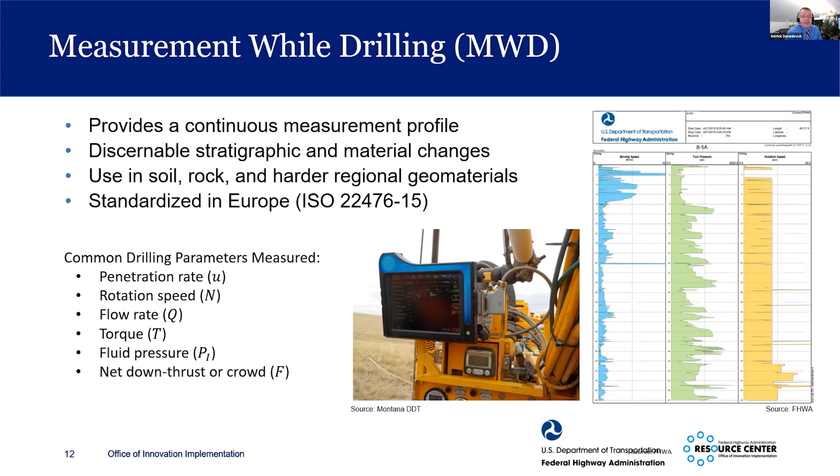Similar to the CPT, it provides a continuous measurement profile with discernible stratigraphic and material changes. It's a lot less sensitive toward driller subjectivity. Can be used in materials where the CPT is not appropriate. So a lot of information can be gained by using MWD techniques.

And we've talked about these a little less frequently than some of our other topics through the A-GaME, but acoustic and optical televiewers certainly have relevance for rock information. Continuous high resolution, spatially oriented images can provide information on in-place rock structure and voids.

It eliminates some of the problems with oriented coring or coring in very soft rocks, or if you have a lot of voids or gaps. And it's independent of the RQD and core recovery. It also provides a digital image, which a lot of times is easier to share with folks rather than having contractors come and look at rock boxes at an owner agency facility.

The last several sessions have focused on constructability, and Ben's done a good job explaining what some of those conditions are. But certainly in geoengineering, we have to be mindful that the design and function of the structure that we're building is often what rightfully has our attention as geotechnical designers.

But there's also a need in many cases to examine, is that foundation buildable? Are we using the right techniques to implement and construct our foundation design? Are there problems with variability, with groundwater, with site access, and other conditions? So we have to make sure that we think of that as well about building our facility, since we don't have the opportunity to wish things into place.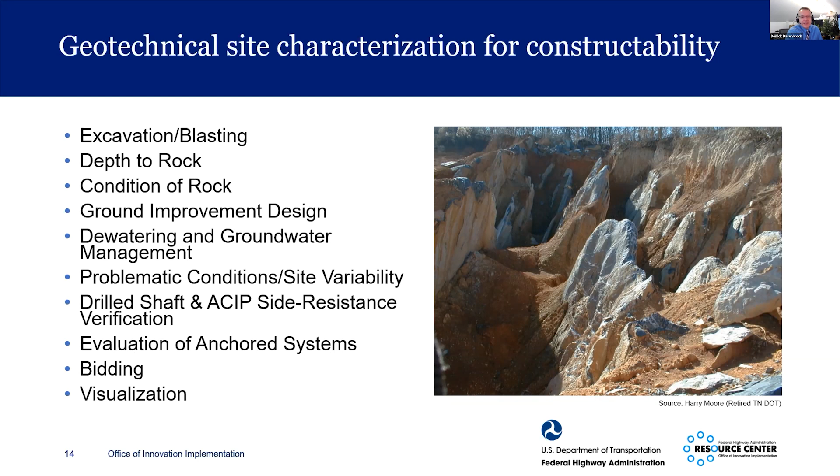We've talked a little bit about acceleration of design and construction, that this plays a role in traditional design-bid-build work, but it also plays an outsized role in accelerated bridge construction, as well as design-build and CMGC/CMAR projects. So involving the geotechnical discipline early is important, and getting information ahead of time can provide future time of construction advantage, even while you're still in the pre-design and final design phases. As with project management, the earlier you know something, the more successful implementing change will be.

We have to respect the fact too, that it is sometimes difficult to engage with all the people that we need to say, hey, this project has some extra geotechnical considerations on it. A lot of times there's a boilerplate process. So some of the ways in which we can make sure other stakeholders are aware of the importance of some of the geotechnical aspects of projects are providing them data early that's meaningful to them.

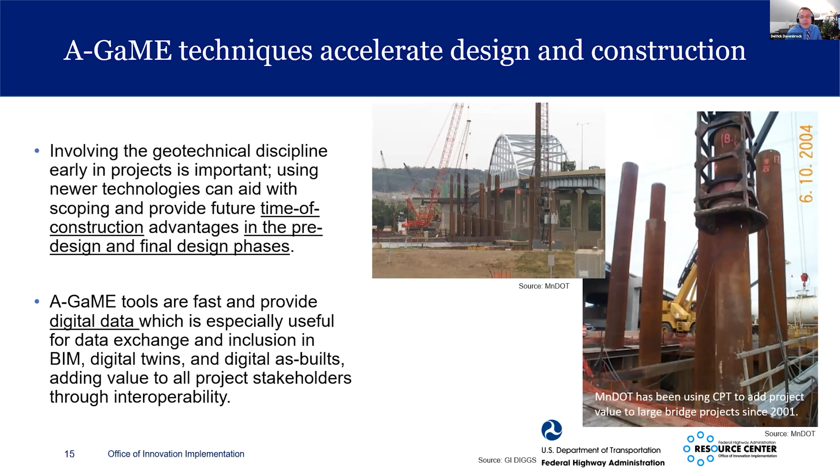So the A-GaME tools are fast. They provide digital data, and this is especially useful in data exchange and now for inclusion in BIM, digital twins, digital as-built, but also for visualization and exchanging data with our colleagues during the design phase, as well as external stakeholders in case there are decisions to be made along the line, say if we're even in a very early stage for selecting an alignment where it might be possible to avoid a problematic area very early in the project.

Alan did a great job talking about the evolving digital geotechnical workflow, EDC 6 after EDC 5, where the A-GaME sits. Talked about e-ticketing and digital as-built. We've mentioned DIGGS, Data Interchange for Geotechnical and Geoenvironmental Specialists. And I'd also like to mention AASHTO's provisional standard, PP 102-20. The technical subcommittee developed this document, and so it's an option for transportation agencies right now to specify the use of the DIGGS standard for digital interchange and interoperability.

And right now, people who've been working on the DIGGS standard and framework for a number of years are also actively participating with international organizations, the Open Geospatial Consortium and Building Smart International. And I'll talk about that a little bit more in the coming slides.

There was a question from part one about DIGGS. So as Alan mentioned, it's a GML application, so it inherits a lot of properties from Geography Markup Language, consists of these objects, and the objects have properties. And with any luck, you'll never need to know about it. You can think of it as needing to understand the code for the way your digital television receives its signals to encode and decode information. It's there, it's important, but it's really not something that the average user needs to know. It is, however, important that the developers know how to use it and implement it.

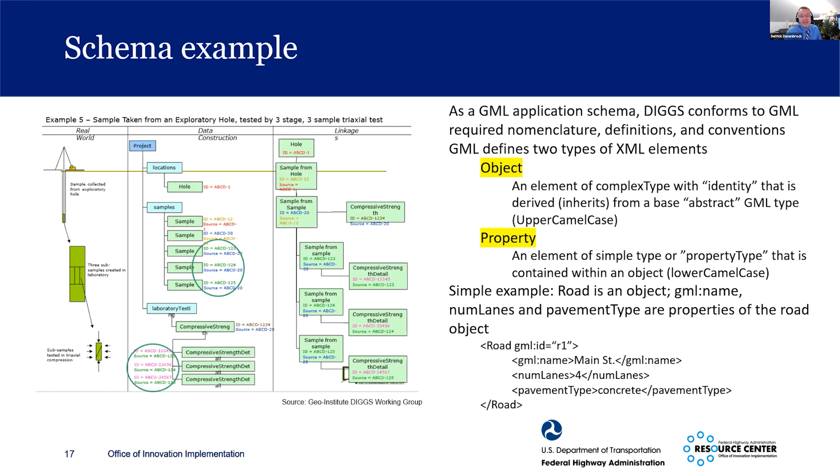Once all that is established, and everybody is using the same nomenclature, software programs know where to look. They speak a common language, and you don't need to define that again for each individual user. A number of conversion tools already exist today for exchanging data using correspondence files, or you can think of it as the Rosetta Stone for language importing and exporting. As long as we know what something means in one language, we can change it to another, in this case DIGGS, and we're then able to import and export information.

So why do we want to do that? The key is really interoperability. What we are looking for is a way to exchange data that does not require human interaction of pulling the data out and telling somebody what it means. You can think of if I had to send a spreadsheet and explain what was in every column or row. Well, DIGGS does that automatically.

So your on-site logging tablet can load information into your boring logs and your field software, which can go into your design and analysis software, which then can talk to your CAD software, and maybe that goes into your transportation asset management plan, or interfaces with your lab software or real-time sensing data. Maybe that goes on your GIS maps, or in your BIM software, or maybe you exchange it with external customers, clients, stakeholders, contractors. If everything is interoperable, then all of this happens seamlessly in the background.

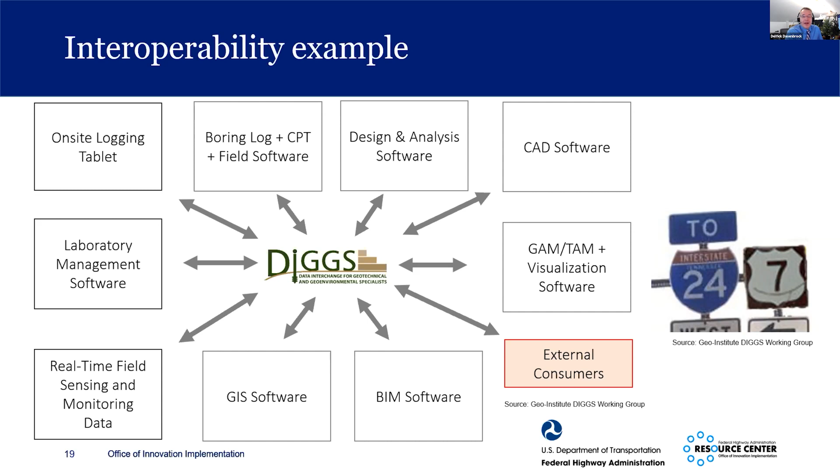And what can you do with it once it's there? We have a number of applications currently in development. Some are related to assessing variability, the coefficient of variation or how regular some of the data is. We're now actively having users take a look at AI and machine learning for adaptation, being able to pick out layers of interest or layers for auto-picking certain characteristics that we're looking for in our soil profile.

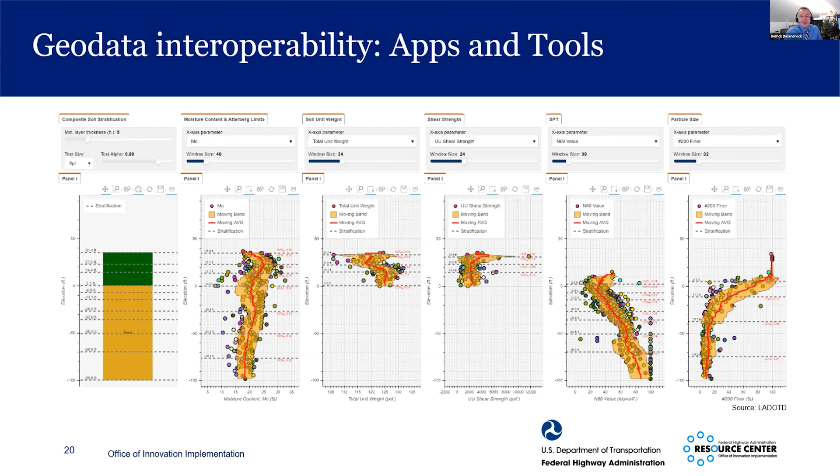And potentially providing information on what's happening between boreholes. You can think of a lot of geostatistics and kriging and other information that we're hopeful will be available to you in software packages shortly.

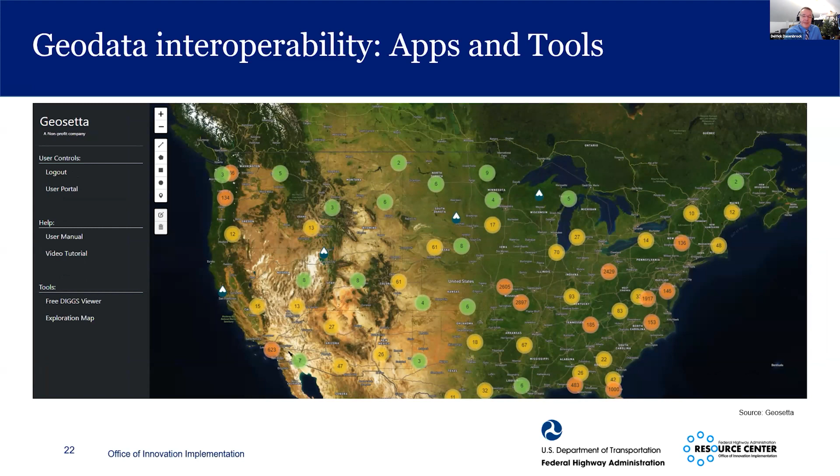Alan showed a map. This was from the Geosetta tool. I took a quick screen grab of some of the information that was in there, represented in March of 2022. We had some projects in Ohio and Tennessee in that program software. This is what the map looks like in August of 2022. That area in the middle US has expanded greatly, and we're imagining that with time and people sharing their data, this map will become even more populated in the near future.

So I often say the future is arriving, but really the future is here. DIGGS XML is beginning to now actively benefit the communication of geotechnical data. Several state DOTs are using it. They have exported into DIGGS, and there are a number of developers looking at building DIGGS into their platforms, either for borehole, lab data, instrumentation data, or CAD architecture. This all plays an important role for data management and for asset management generally.

Steve this morning mentioned the importance of getting geotechnical data in an electronic format so that contractors can work with it efficiently, as opposed to paper or PDF copies of logs of static information. We're looking at using some of this data not only at the project level, but also at the program or enterprise level. The information can be used for reliability design calibrations, think LRFD resistance factors, as well as a host of other technologies that rely on large data sets.

E-construction and digital delivery is happening now: transfer of electronic plans, especially 3D plans. A lot of Departments of Transportation are looking toward this; you see it out in the field when people are doing surveying, but mobile devices, software, and other field applications are becoming increasingly common. We now have data hosting services, data in the clouds, shared sites, electronic review and approval for documents and signatures, and communication tools where things are automatically uploaded to websites rather than trading around email with spreadsheets. All of this is starting to be seen in the realm of asset management with electronic as-builts.

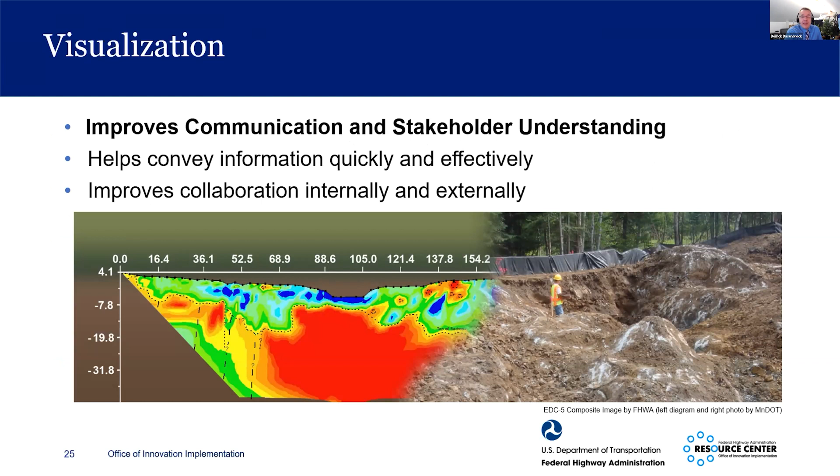So, visualization improves communication and stakeholder understanding, which is important because it helps convey information quickly and effectively so that everybody has the same picture. You can imagine that this sort of collaboration is important both internal to your organization and externally, with new collaboration and communication tools.

Alan talked about HoloLens technology taking information which was previously on, say, 11 by 17 black and white plan sheets, and now displaying it holographically in a 3D environment where users are able to collaborate, move around, move the design drawing in 3D, move it up, down, sideways, look around, point at things, and observe conflicts in 3 dimensions. You'll be able to see if that pipeline happens to go through your foundation, or if the foundations happen to be a little too close for comfort to that slope that you didn't really recognize when you were doing the initial design.

Things can be seen that wouldn't show up if your cross section doesn't happen to be the critical one. If typically you only cut a cross section every 50 feet or so, and something interesting was happening at 75+2, now you'll be able to see that sort of information somewhat easier.

A quick little foundation selection example. Seismic cone penetration tests were used to evaluate the soil stiffness for a project in Minnesota, which was originally conceived as a piling project. It was determined that the soil was adequately strong and stiff so that it would meet the serviceability requirements of less than 1 inch of settlement. So a change in the design was made, and a small platform was built underneath the footings with a fabric wrap in case some overzealous ditch diggers came around front, so the soil under the footings would remain in place. And you can imagine that the information for that project might be easier to see in 3D space than in 2D space.

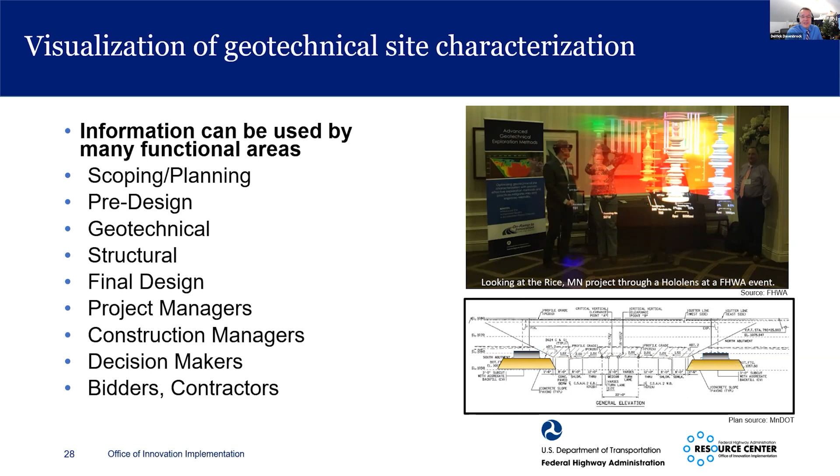Building information modeling is here. It is very common in what I'll call the vertical space for buildings, and increasingly common for horizontal construction, especially with complicated structures—think about curved steel bridges or alignments which wind through areas or are in dense urban environments, or have a long set of bridges rather than just one.

It's a set of technologies, beyond just 3D CAD. It contains more and more project information, and the virtual model can be shared, used, adapted, and exchanged among stakeholders in the project. A vernacular for it is a digital twin. The information can be dynamic—you can put information in at various points during construction to take snapshots as new structures are actually built and look at how things change with time.

It becomes a resource for information: what are the physical parameters of the beams that were shipped? What are the heat numbers of the steel? When did the piling arrive? When did you perform various operations on site? So you can think of it including information useful for inspection, cost, and schedule, as well as the nuts and bolts of the CAD design itself of where everything goes in space.

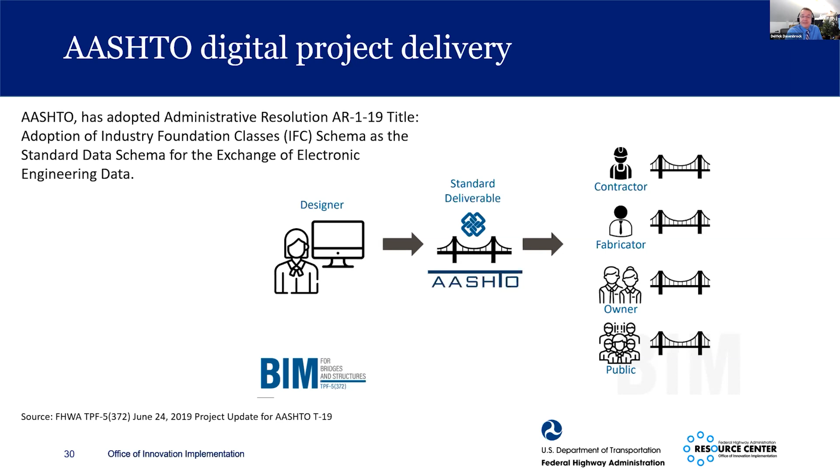So you'll be seeing more of it because AASHTO has 2 pooled fund studies, one for bridges and structures and one for other design elements, looking to make these industry foundation classes, essentially BIM, a standard deliverable from designers to contractors, fabricators, and others. This is active and in process, and as BIM matures, you'll be hearing much more about the IFC data schema and different file formats.

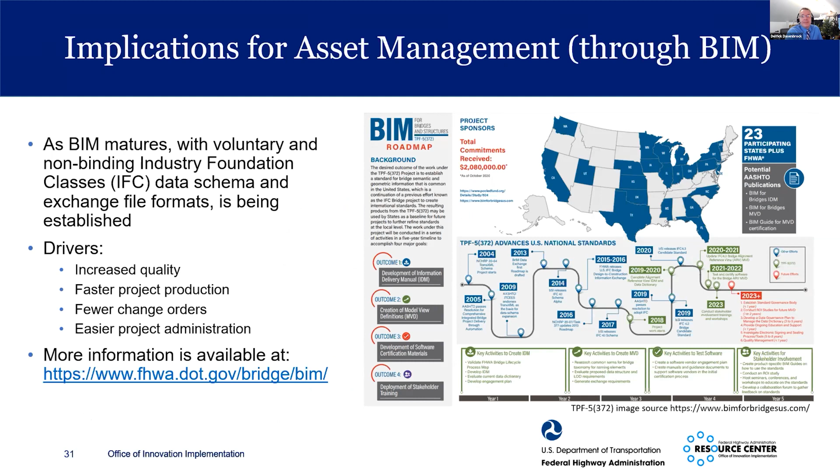How does the A-GaME fit into that? Well, we're all about cost, schedule, constructability, risk, and reliability. It all plays into this idea of communication, visualization, and collaboration.

This evolving role in digital project delivery, and part of the geotechnics is the whole process and the life cycle.

It also has implications for some of the things that are going on with the bipartisan infrastructure legislation. You can think that providing information early and having access to it provides additional resources for people that are considering

aspects of projects related to equity, sustainability, and resilience. The more information you have, the better you can look at those particular aspects of construction.

So, bridging the gap, the topic for today. The location, type, and quality and quantity of measurements do have a significant influence on the appropriateness and reliability of the parameters we use. This is important for geotechnical design, just within our local process as geotechnical engineers.

It's important for bidding the project well and correctly. It's important during construction, relating back to those constructability issues, and then for the overall project life cycle. So not only when it's delivered on day one, but also through its intended design life.